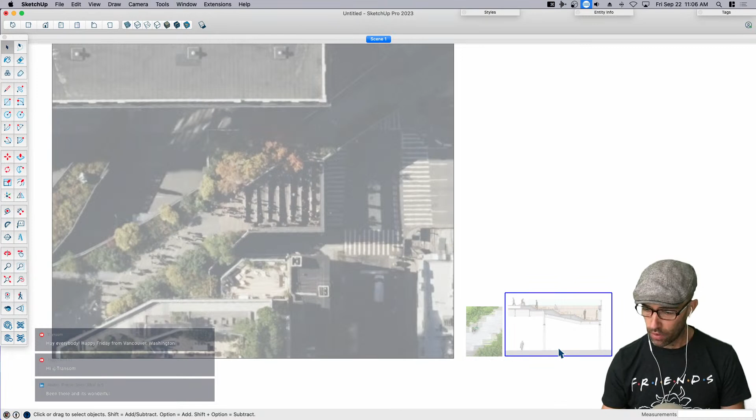One of them is an elevation image, and that's going to be really good because we're working with grade changes - we're up in the air, so knowing that is important since we're changing grade along that part of the High Line. The other thing I want to work with is this paving module. If I turn my X-ray mode off, you can see it better. This paving module is kind of iconic, based off the railroad ties that used to be up there, so I'm going to build some of those. That module is really cool too, because as you move along the High Line, it sort of becomes other things - it becomes other parts of the park.

If we're lucky, depending on how far we get, I'd love to put some plants into it, because if you just had the concrete and the wood, it feels like it's missing something. What would an Eric model be without plants? I know - I've got to represent my background, my peeps, my landscape folks.

For those that know, when I trace stuff I like to change my color and sometimes my profiles, push this up a bit. I actually have a tracing style built into my template - if I click on this one it should be called tracing, built around the idea of tracing. Once I'm done tracing over an image, I'll switch back to my normal drafting. The other thing I want to do is lock the image, so I'll group it and lock it so I won't accidentally delete it.

So this first part, Donovan, I'm just going to trace this here. I've already scaled this image, so I know it's to scale - I'm just going to trace it. Let me know what's going on in the chat while I get something started.

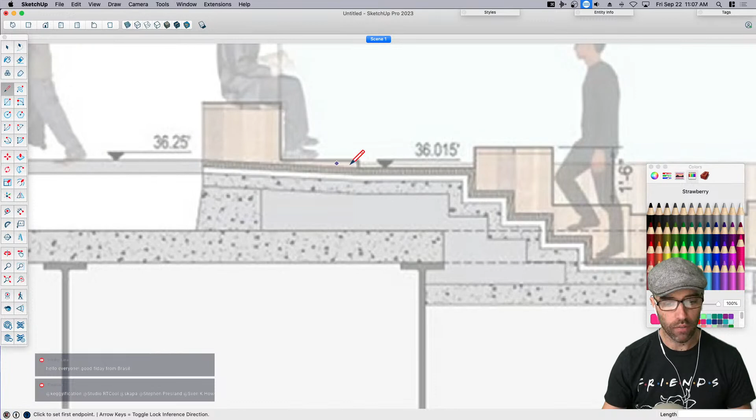We've got people chiming in from London, Copenhagen Denmark, Vancouver Washington. A couple people said they've been there and it's wonderful. One person said they went but it was raining, so mixed experiences depending on the weather. We have people from Brazil, and of course here in the U.S. Lots of shout outs to the regulars here in the chat - you know who you are, you're here all the time.

That's interesting - sorry Donovan, to interrupt you there. This is 36.25 as my landing elevation, but when I go 36.25 foot and bring it down, it's actually bringing me below grade. What this means is when they do spot elevations, they're not measuring from top of street up - they're measuring from top of sea level up, treating that as zero. So if you check the dimension of the height, it would be 28 foot 8 inches, which matches the reported average of 30 feet high - that tracks with what I've read in the news.

So now the trick is that if I'm going in with spot elevations, it means I'm drawing from this line down here - so this is now my new zero line.

Does that make sense? A comment came in from YouTube saying grouping an image with something else locks it. That's clever.

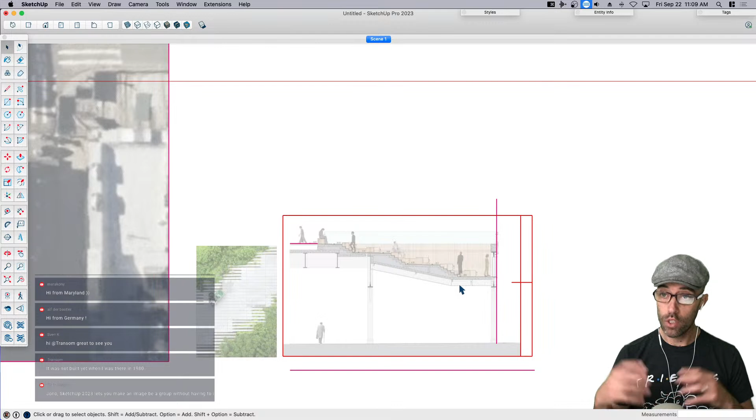When you do that, if you bring an image in and explode it, you can group the image itself because it's turned into loose geometry with edges and faces. But if you don't explode it, the reason why I don't like to explode it is because of something I often do.

What I'll do is draw on top of it, maybe add a color, and then end up drafting in monochromatic mode. So you can see what happens here when I go to hidden line style: the location snapshot, which comes in as an image or texture, disappears. So textures disappear. I prefer not to explode my images by default, so I can go to hidden line style anytime I want, otherwise I'd have to go back and I don't like that.

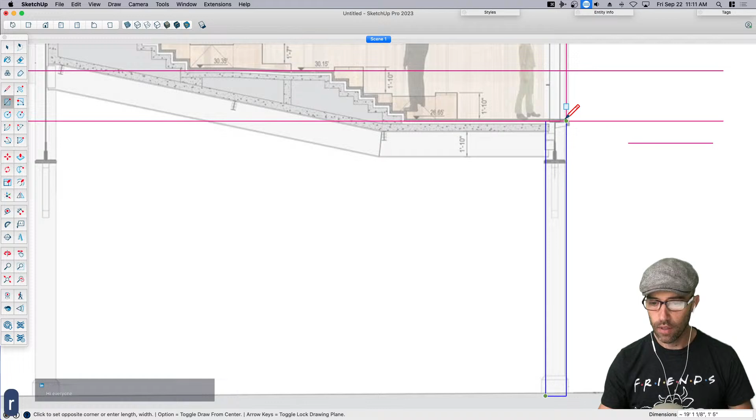Now I'm going to do this column here, and make this a component because it repeats 1 foot 5 inches. If I need to change that, I will. For right now, I'm just going to make this a generic column, make it a component, not worry about naming it—we're going pretty quick.

Usually with this kind of stuff, I'll look at it first and say, well, 34 feet 11 and a half inches—is that really the dimension, or is it probably 35 feet? So I'll enter in 35 as opposed to just placing it, because I feel more confident knowing that. In this case, I can stretch this up, stretch this one up to this column, up to the bottom. Yeah, right there. Whoops.

Did I actually—yeah, something people are talking about in the chat: SketchUp has had a new update. If you haven't already done so, be sure to update it, because there are new features like snaps in the new update that you should check out. If I can show off, I might show some snaps or those features, and I'll make sure to call those out.

I think the biggest one for people right now is probably the UI that everyone's noticing—it's going to look a little different. If you look at the icons, you'll notice my eraser tool right here isn't pink anymore, it's blue. Change is hard, but I'm a shortcut person by nature, so I do keep all my icons up because it's important when we're training. When someone's first learning SketchUp, I'll try to use the icons, but in these live streams, you'll see I'm almost using exclusively shortcuts, which is why the key caster I use is helpful as well.

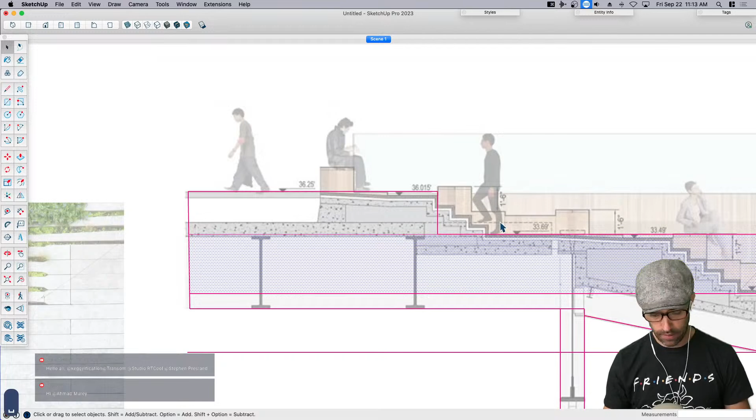36.015. I'm going to treat this whole landing as flat, just for sake of fun, because there is going to be a cross slope on it, but I'll deal with that later. I'm just going to pretend these landings—you'll notice I'm ignoring that little half inch, probably just one of those sloped drains kind of thing.

And that starts to get pretty particular. 1.5 feet? Nope, that's not it. 1 foot? Yeah, there we go. That's a 1 foot tread. So in this case, just kind of getting myself something to work with here.

Times 2. And then I have to think about what the height is. The height of a typical stair tread should be 6 inches, so let me double check that. It is 7 inches, that's okay, let's go with 7. 7 times 3, there we go.

So I may want to go back later and make the stairs a component, but for right now I'm just going to get something as my base for this thing, and then I may end up removing this piece and making them a component once I get into plan view.

That's actually interesting. So one thing I could do too is figure out where this cut is occurring. If I wanted to, I could come over here—I'm trying to think of how to do this. This is why I like to prepare, because then I actually know what I'm doing, as opposed to just having you watch me sit here like this. It's my thinking phase, because we have this in plan view and we have this in elevation view.

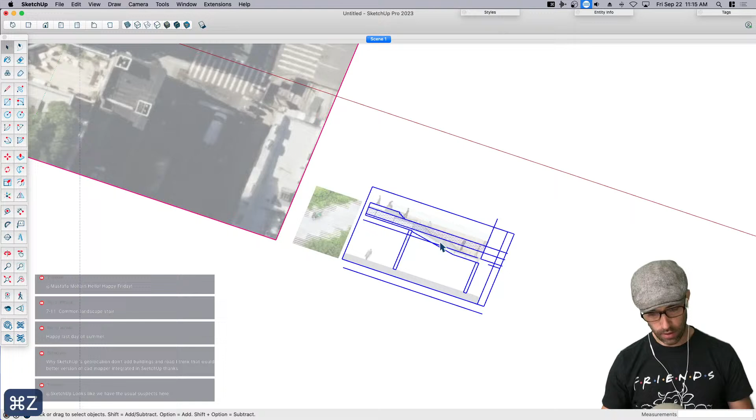Now the problem with this is, if I go to top view, you can see I'm looking straight down on it. That's kind of the challenge. So one thing I like to do is make this a component, and then copy it over, and copy it up 90 degrees. Are you with me?

And then I'll move this into place over here where it belongs on the plan view. So if I look at this, I know this corner here lines up with this edge right here—a little blurry as I get close—I know that's that.

The cool thing about that is I could also come in and, just for fun, sink this for the moment. So we could start low and pretend that this is the bottom of the image and work our way up, or start high and work our way down. It just depends on whether you want to sink below grade or push pull up. Sometimes it's easier, I've found, to pull things up than to push things down, but it's totally a preference.

Cool thing about making—what situations would you do the working from the top down rather than bottom up?

It's just because, depending on your style, if you have the ground showing—like if I have ground and push down into the ground, then you're going to see it, you'll see the ground through it. So if you wanted to show something below like zero grade, that might be a situation where you'd want to work above rather than go down below grade.

So, yeah, now I'm trying to think here. I'm going to take this module and make this sort of a module, and the reason why is, so how tall do you think that is? 1.5 foot? Yeah, I'm going to say that's 18 inches.

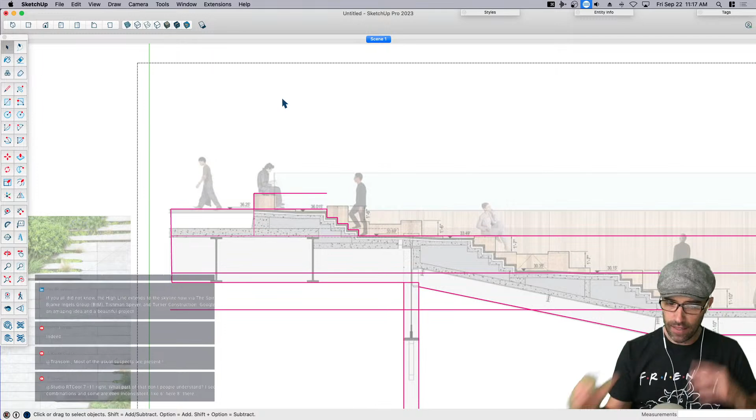So I'm curious, do you guys have to do this—this is the fun part, it's the thinking while modeling, right? It's one thing if it's your model, you can make it whatever you want, but if you're modeling something from drawings, you've got to do a lot of thinking. So thinking and modeling is kind of actually hard to do.

2 foot. Somebody chimed in from LinkedIn, said if you don't already know, the High Line extends to the skyline now via the Spiral, 66 Hudson. I don't think I knew that. Google the Spiral in New York City—it's an amazing idea and a beautiful project, the Spiral in New York City. Should we Google that?

We'll have to come back to that right now because I want to stay on seat walls, as much fun as... so the Spiral is, I know the Vessel—I know that's a little bit different though, that one's in the Hudson Yards.

Nobody's chimed in to say it yet, but you might as well save. You know what, that's a great idea. I appreciate that. We're gonna save this High Line.

So what I need here is anything I know is going to repeat, I'm just making it a component for right now. Oh, I see, I've got a little stray edge there, that's why my bounding box is being funny. So right now I'm still in elevation view, which is a little bit... let's get out of elevation view, but I have to have enough to work with before I can switch to plan view. I need to make sure I've got some faces that can be extruded.

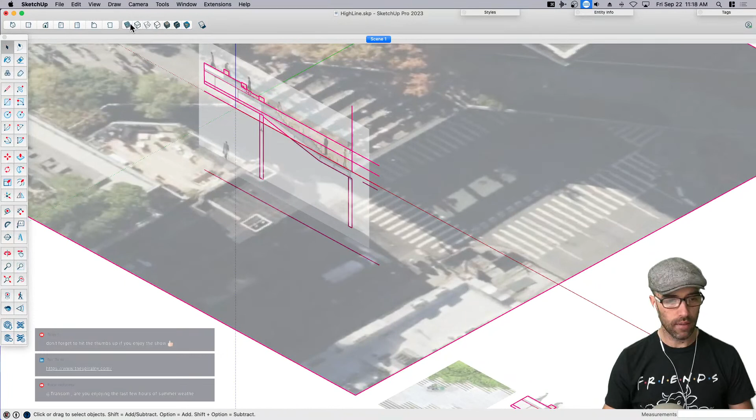So you can see here what I mean by doing this in two ways. I can now come over here when I feel comfortable and say, well, I'm going to take this and extrude it out like that. Now the problem is that my image disappears when I do that. This is the challenge, I may end up copying this, doing the opposite, which is copying my image and bringing it inside of my group, which is a little bit weird. But then that way when I'm working on pulling this stuff out, I'm doing it properly.

Yeah, I'm going to do this, I'm going to hide this. Whoops, I didn't mean to hide everything, I meant to hide just... it's different shortcuts. I just said two seconds ago, I mean, it did what you wanted it to do.

So this is going to be, I'm going to call this my AXO view. I'm going to update this. And then what I'm going to do is unhide this here, and I will go into plan view and create a scene called plan view, so I can bounce back and forth between the two. Plan. Rename plan. All right, so AXO and plan. There we go. All right, so back to plan.

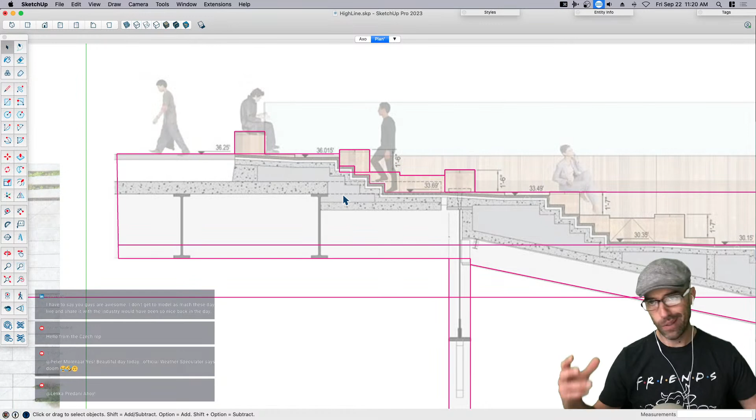What is the plan? The plan is to finish mocking up just the straight elevation, and then I'm going to take all this stuff here. Let's see here, I'm just going to create this. I'm not going to worry about all the subflooring, I'm not going to worry about any of the support structures. We're not going to go into detail about what's happening below the surface. We want to just think about this as just the surface and above.

All right, so we're going to get another seat wall module. I'm going to bring that over here, and I'm not worried about the horizontal dimensions because those will just work themselves out eventually. So I'm just going to kind of line it up with the image.

So Ben from LinkedIn said, I have to say you guys are awesome. I don't get to model as much these days, and watching you all model live and share it with the industry would have been so nice back in the day. Yeah, thanks Ben, appreciate it for watching and all.

Oh, that's weird, see this is the problem with 3D when you do this in 3D. So I'm probably going to just come in here and remove that part of the component and stay in 2D until I'm done.

Yeah, this is, I mean, I would totally watch these. I didn't get to watch these learning the software either, but watching Aaron and seeing how he handles stuff, especially when things don't go according to plan, which occasionally they don't. And also the fact that you get to join us, you get to ask the questions. If there's something we're going over a little too fast, or if you're like, hey, why did you do it that way, this is a chance to sort of participate in that process, which is pretty cool.

And this one I probably want to... I'm just going to move the stairs. I just need these stairs, so I'm going to copy them and bring them over here.

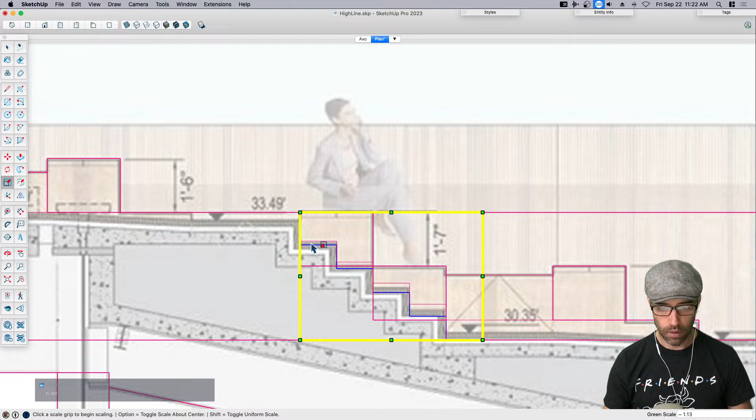Because I'm pretending not to get to the cross slopes, I'm going to have to cheat this a little bit. The reason why is I'm going to make the stair treads a little bit higher so I don't have to do a cross slope on my horizontal. It's just going to be a little visual trick, a little higher than 7 inches.

I made that a group first because I was stretching it, and if I did that, I would stretch all the geometry. So at some point in time we'll explode all this stuff, which is going to be kind of cool.

Like that game, Exploding Kittens, you ever play that one? Donovan, are you a card game person? We play card games in my house every day, and that's not an exaggeration. We haven't as a family gotten into Exploding Kittens yet because I think my kids are a little bit too young for it, but one day Exploding Kittens will be in my house. I've had the opportunity to play with friends, and the company that makes Exploding Kittens and all of their subsequent games they've come out with, there's probably like 30 or 40 now, are all just fantastic. They do a great job.

So I'm just going to start exploding stuff here. Now I'm at a point where I'm ready to clean this up, get out of this elevation tracing mode I'm in right now, and start actually turning stuff into 3D. But I needed something to work with, otherwise it's like, how do you do this? You don't have something to start with.

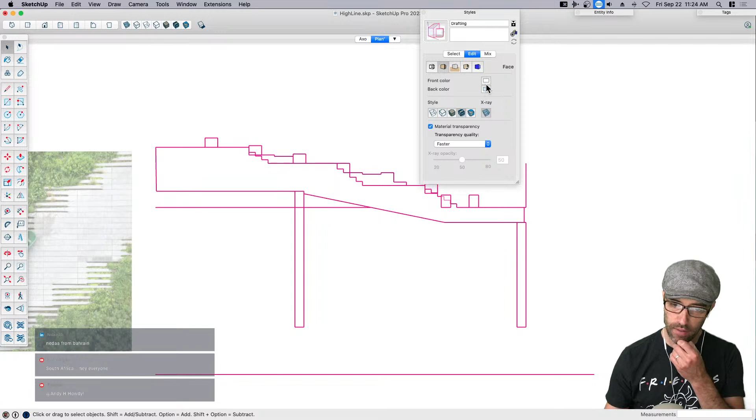So anytime I get a line, I'm really wanting to make sure ultimately I'm also going to have to hide my faces, hide this. Sometimes it helps here if you wanted to change your background style or your face style. In this case, if I wanted to do like a gray or something, I could use a dark gray, and what that would do is tell me when my faces are filled in.

The problem I have is when modeling on a white background, because when you go monochrome everything turns white. And if you have a gray background and go monochrome, everything turns gray. So instead I do the opposite: I turn my faces gray and leave everything else white.

So this just tells me, okay, I was doing some cleanup and I need to go in and make sure all of the stuff is faces. So I'm exploding all those. I didn't really need to make them all components, but whenever I have something repeat, I make it a component. I don't know if that's going to bite me in the butt, but at least I could still remake the component.

I mean, why would it bite you in the butt? Well, just out of curiosity -- because if I wanted to apply a texture to one component, or add a beveled edge or something, once I get into 3D, if I just extrude these each as their individual raw geometry, then any changes I make to a seat wall, like bringing it up an inch, I'd have to do that manually to each one.

What happened here? Ooh. Yeah.

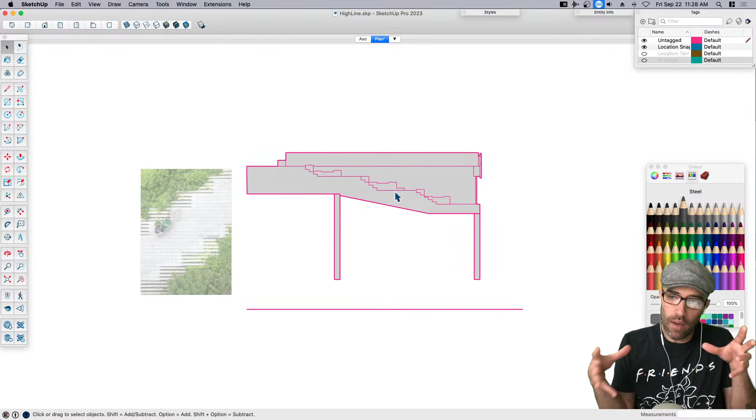This is the area, the observation deck part of the High Line. I'm going to come in and do the decking, the benches, these cool modular concrete pieces, lay out some of the walkway, and then put some planting in. So we've got quite a bit to do, and we're 28 minutes in.

The hard part is this setup. The hardest part is this thinking part, do you know what I mean? Yeah, I know what you mean.

This kind of reminds me of Matt's t-shirt, 'Fix it in pre.' You've got to do all the setup work, the pre-work. Yeah, but now think about fixing in pre.

I don't know where my image went, I might have to go get another one. I might have to come over here to geolocation, I may have accidentally deleted my geolocation. I don't think I locked it. Are you inside a component? Because it looks like your axis went off too. No, I don't think so. Nope, I'm outside of it.

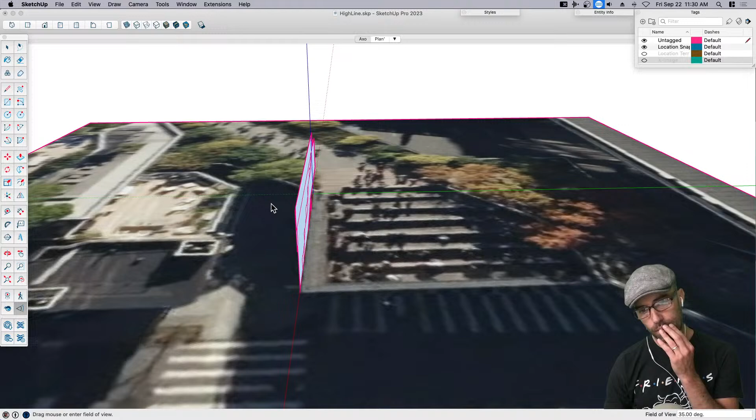What I want to do here is turn off this image, and come back to this one, turn this one off as well. For those who don't know, I model quite a bit, and I like to model in axonometric mode, in parallel projection, since I think it's easier for some people to see. I'll try to do this for you though, which is to model in perspective. What we need to do is pull all this stuff out to here, which is going to be the tricky bit because we're at an angle.

So if I just trace what I know the bounding box is, I'm going to go to here, and I'm just guessing at this point because I don't have any plan view information. I know there's a walkway that runs along this edge, and we're going to take our decking all the way to, I think the decking goes to here. So there we go, that's what we're going to do.

I'm going to come over here and bring those down so they sit flush. There we go.

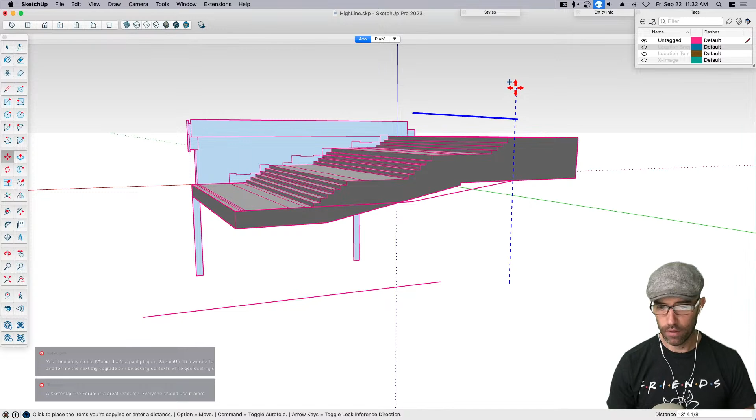Yeah, so speaking of, good, I like it when you talk for a few minutes Donovan, because it lets me think about what I'm doing, I swear. So for people who have seen me live model, I shouldn't have to apologize for being who I am, but I do better when I'm prepared because it means I follow my script. My wife tells me this: when you go off script, Eric, you tend to not do as well. So I will say that, I don't want to apologize, but you have to kind of struggle through with me for a little bit.

What I'm trying to do is figure out, I need to slice this off, but it's not a solid. I would use solid tools and then just delete this. Instead, I'm going to probably grab this as a cutting plane, pop in here, and select all of this and say intersect with selection. In fact, I may want to explode this first, which I'd usually say be careful when you're exploding stuff. And I'm going to switch my style back to just my normal style.

Why do you want to explode it first? Well, because I'm going to use that edge. I'm going to right click everything and say intersect with selection, not with model, because you have to be careful - if it's exploded, it's going to interact with both this and this. So what I'd do is sometimes just grab this piece here. You're going to see here in just a second. I want to grab this face, that's why. So I'm going to copy that.

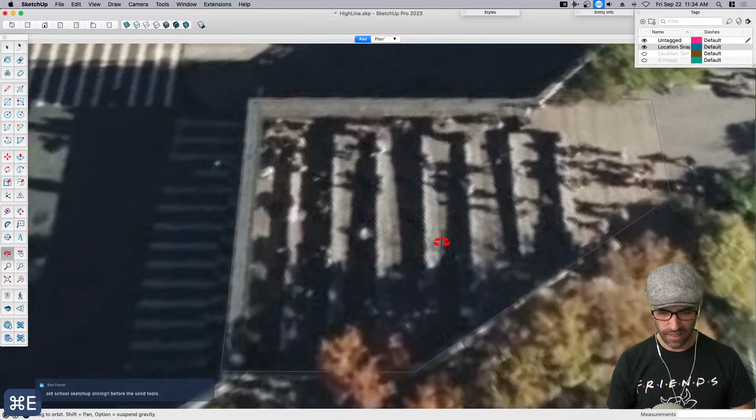So now there is a stramp that goes down this piece, but I don't know, I have to decide. I may want to come back to that, because we're going to cut into this and need to do a stramp, but it's going to be a little difficult for me to see. The reason is because if you look at the location snapshot, if I hide this for a second, it's kind of blurry, to be honest. I know there's a stramp that cuts through there, and I think, but I'd have to switch to a photograph and see that.

See, I made a big mistake. The stairs only come down one side. This is why you look at the photographs first. The stairs are not the whole thing - the whole thing is a stramp, and the stairs only come down to one side.

So unfortunately I have to undo quite a bit of that. I will leave this, I'll go all the way up into where I had a cutting plane. I will leave my cutting plane because I think I'm still going to need it. So I'll just group that, copy it, and then undo that extrusion that I pulled.

Look at all my Command C's that you see with my keycaster, it's a lot. You can do up to 100 undos - for those that don't know this, you can go up to 100 undos.

So you copied it because even though you undo, you can still paste. Yes, at any point. So that's a good point. I can come over here and paste in place, and that cutting plane. So that's kind of fun.

Sometimes I'll go in advance, get a piece that I need, almost like a time machine, go back in time, do something, and then paste in place that thing that I needed in a future step. I don't actually need that thing in the future, I don't actually want that, but I need it now. So I go back in time, I copy from myself and then go undo. You can also obviously do a save as and then go work into a separate model, but I'd rather just work in the same model.

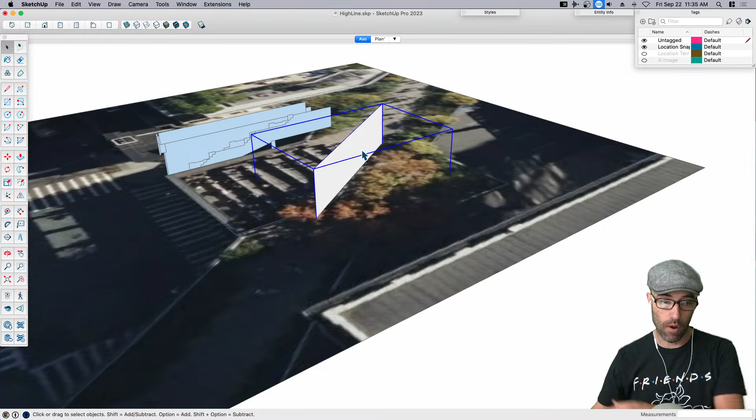So what I needed to do, and I made a mistake, what I needed to do was do these stairs separately because they only show up on that first walkway bit, and then from there they stop. So I'm actually grouping the stairs separate from the rest of this geometry. If I was smart, I would have done that - I would have looked at the reference photo before.

Fun times. Okay, so I could also do there is a new, hey, I'm gonna try a new feature. There is a lasso select tool, which I hear is kind of cool. So I may be able to come over here and just lasso select those. That didn't work, I think it's because I had to go this way. So the lasso select is whatever it touches, correct? Yep.

So if I'm trying to do this really kind of tight, irregular space, like these stairs, I could just take that. And so what I want to do is basically, I don't know where my stairs... Donovan, this is where I need help. What did I do? No, you didn't do anything.

I'm just going to do another version of this. I'm going to come back to that because I'm going to need it. And I'm just going to come into this version of it, and I'm just going to pull all the stairs out completely. I'll just go back to my other version later. Okay. Right, folks? See what I'm throwing down?

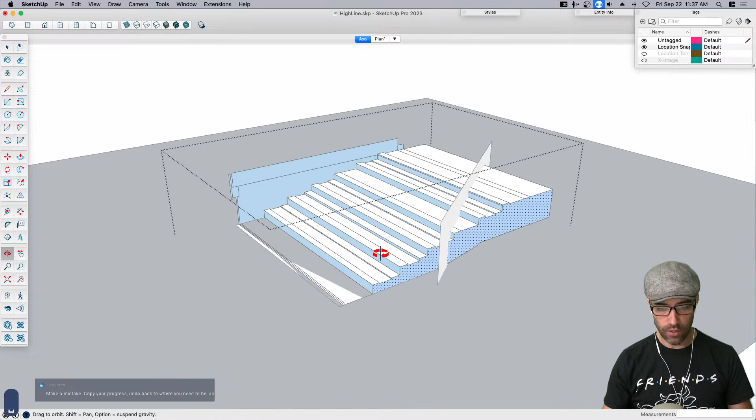What I want to do is I just want to pull. This is tough because we're working at an angle. We're working in plan view and elevation view at the same time. So this is what I'm trying to get to here. And then what we have to do is I'm going to have to pull some of these surfaces down. That's going to create the stramp.

And then what I'm going to do is come over here, and I'm just going to get rid of all this stuff because I already have it saved in the other one. So almost like I needed to do this in several pieces.

Hope this is fun for everyone at home, hope this is, learn from my mistakes. This is how we do this on SketchUp Live. Learn from what I'm doing. In some cases, it may not work for you at home, folks. I mean, honestly, if there's one thing we've learned from Live is that people enjoy the struggle. So it's okay, I've learned that the struggle is okay because ultimately people enjoy watching us struggle. Yes. You know what? Also, misery does love company, I hear. So I'm really glad to have everybody at home with me as I kind of go through this process, or process, as they say, for our Canadian viewers that are with us today.

All right, so what I'm doing here is I'm going to want to do this in a couple different pieces. Why am I losing a face? And I know people are saying I have reverse faces. So a fun way to check that is sometimes it's hard to tell - if you come over to shadows, you can actually pull your darkness and lightness sliders all the way down. And you can see that when I did that extrusion, everything is reversed. So I may want to just fix that now, is just go in and reverse all of those.

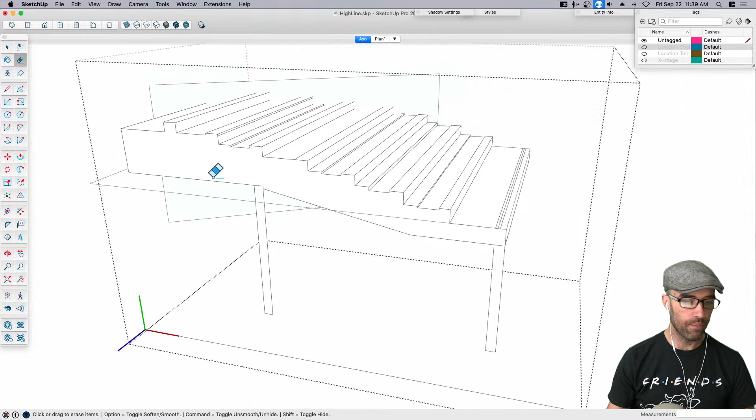So if we go back to this plan view here, now I go in here and grab this group. First thing I need to do is check this dimension. This is the stair here, these are the stairs, so I just need to check. I have no idea, it's pretty blurry. 4 foot, I could guess. Is that a 4 foot stair? Yeah, I'm going to go with 4 foot.

So then what I would do is come over here back to my axo view. Styles, set that, turn that on, update, and update. Okay, so from here I would want to come in here and push this 4 feet.

And then I would come over here and find, where's the one that I copied, Donovan? I don't know, where'd it go? Remember how I hid one? Did you remember how I hid one? Yeah.

Well, are you going to pull up an old save point? Might be able to go into an archive based on when I last saved it, and go in and grab this one here, the one with the stairs. And then if I was, see this, and then I come over here and just paste that right in place.

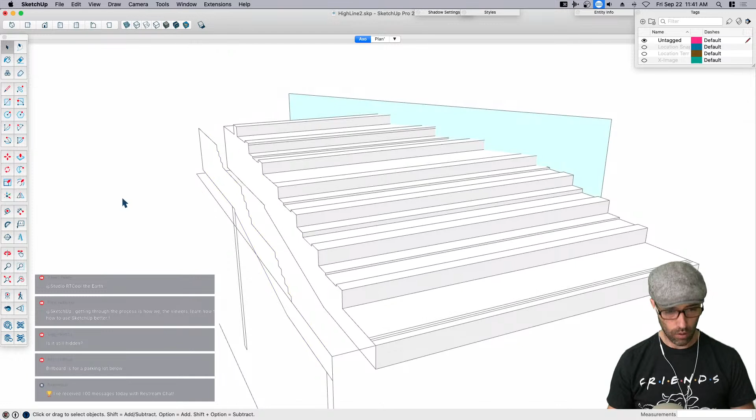Now, because it's a component, if I go into this group and paste that in place, you'll notice what happens. Peggy's asking, is it still hidden? No, I just turned on my hidden geometry, which I can show you. View, hidden geometry, view, hidden objects. They're both on. The only other thing I may have done is accidentally assigned it to a different tag. But no, it disappeared. You know what that means? So I probably deleted it.

It's okay, it's okay, folks. All right, are we okay with that? Yep, are you okay with that? I need you to say yes right now, Donovan. I need your help. If you're okay with that, I'm okay with that. Okay folks, let's do this then.

Let's go back here, I'm going to copy this, go back, and do this step again. I'm going to explode this. I'm going to select all of these two things here, intersect faces with model. I'm going to grab that face, copy it. This I want to do a group delete. And this one I have to be really careful with, I don't want to get stuff that I don't want to. Group delete, paste in place. And we're okay, we're back. Salvaged, nice recovery, nice recovery. Okay.

Now I've got to figure out this stramp, because there's no actual.

Let's go back and look at our reference image. The stramp goes down on the other side. Right? So in a way, it starts on one side and it curves and it goes around the backside, which means that some of these seat walls would not go all the way. They couldn't go all the way, it would need to stop 4 feet prior. So where would you be if you were a stramp?

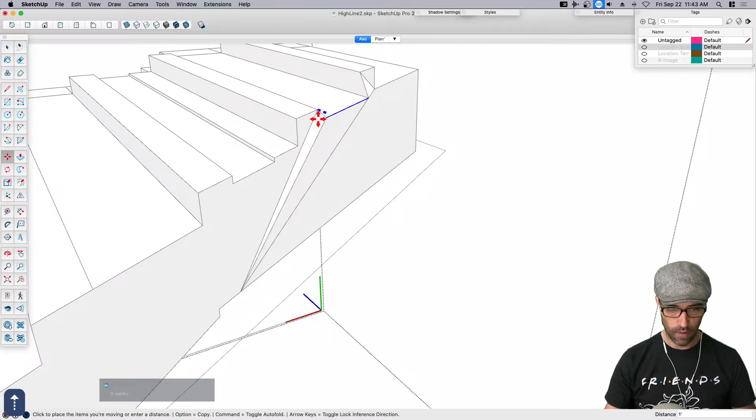I would say that you'd have to come down here, and you'd have to come down, and I'm going to use my inference locking to go down. Nope, not that one, there. And I would come to this point here. And then this one needs to come back.

Oh, maybe you want to do that the other way around. It's probably easier to... here, let me recenter this for you so it's easier for you to see at home, folks. I wish I could hear from the audience. I wish they could just shout out in real time and be like, no, that doesn't work, don't do it that way, have you tried this? That would be interesting to have a live audience participation. Might get a little chaotic, but I'm sure we'd manage.

So this is a trick here. Now, the problem with this is that when you go down, it's going to hold. It's sticky, right? So what you may want to do is take this and this, take what is the ramp, just basically take...

Let's see here, it may be better to come in here and just grade it the old-fashioned way. So what I mean by the old-fashioned way is just to come in here and grab a line and start the top of slope and then come all the way down. We know it needs to go to there. And if you're wondering where this is, sometimes it's as simple as a single line, and sometimes it's more complex and you need to do something like sandbox from contours. But I'm calling that. So you also have to think about where the landing is. So if this landing is flat here, then I can erase that line.

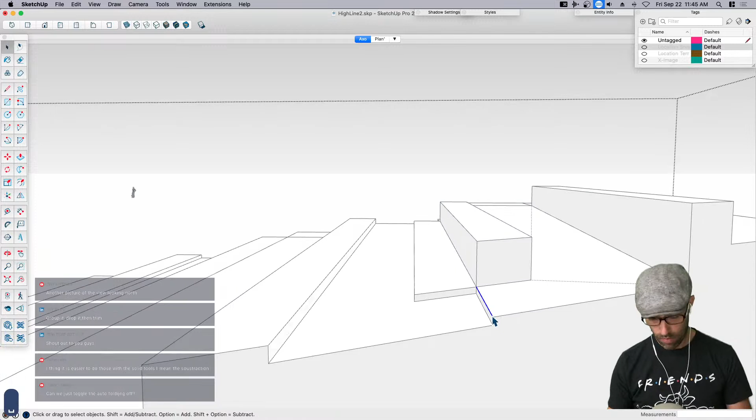You guys didn't know you were going to get a grading lesson at home today. You thought we were doing plants and concrete pavers, but no, you're going to get a grading lesson like it or not. Doing lives with you for as long as I have, I always know there's more to learn than just what you're modeling. I'm an educator as well and I have kids, so I go back and forth between wanting to enlighten and threatening you're going to learn something whether you like it or not. Is that my parent mode or my teacher mode? You're going to get some grades.

Now this is interesting because I don't know what this is. It makes me think there's a little foot platform, almost so that as the stramp goes down, your feet can stay level. I'm guessing that's what that is. I don't remember, to be honest, I was there but I don't remember. So I'm just going to cheat this and make what may or may not be ADA - we're going to call that ADA.

Ahmad from the YouTube comments says, can we just toggle the auto folding off? I don't know, can we? It's above my pay grade. I don't know, I don't know.

Where's Aaron and Tyson? Are they with us today? I haven't seen him yet. Because when you say above pay grade, they both have their legacy, they're old school. They know all those things that I should know, and I don't. I just kind of know what I know, I know what works, sometimes.

Okay, so this bench is okay to go all the way here, and the reason why it's okay to do that is because that one I can't erase, that is a grade change. So that one needs to stay there, and that one has to be hidden.

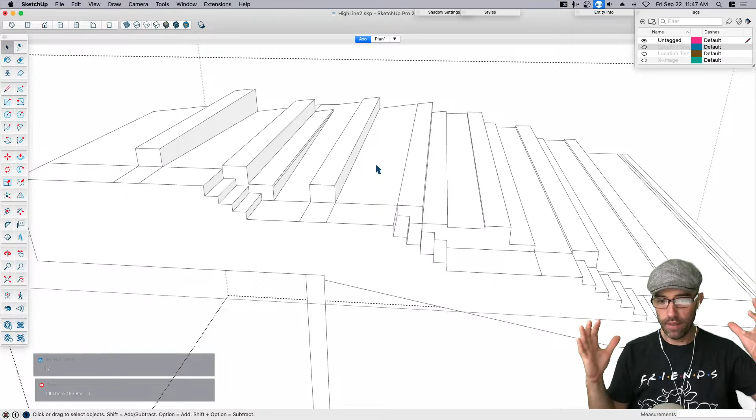All right folks, we've got a couple more of these ramps here, we're almost at the hour. I want to finish the stramp, then spend the next maybe 20 minutes doing the shell of the amphitheater so it's walled in, and then we're gonna have some fun. We'll spend the last half doing pavings and plants and furnishing, kind of build out the actual High Line, the linear path part of this.

Thanks everybody for staying with us, and if you're just joining us, welcome. We're doing the High Line today, this part of the High Line. If you didn't catch the beginning, we're doing this really cool part of the High Line called the observation deck. You're up high, then you drop down low, and you're able to see the cars. You have furnishings and trees and places to hang out, stairs and a stramp and art and all kinds of cool plants. That's what we're doing.

That concept seems very humorous to me, that there is an observation deck for you to watch traffic. Yeah, it feels a bit silly.

Okay, so this one has to go down here, has to come over 4 feet, and then that has to come down. It's actually kind of cool, to be honest. I'm probably the last person who would sit and want to watch cars, but it's actually, because if you know anything about me, my background's in urban design, and part of my job is to get people out of their cars.

My past life - actually it's not a past life because it's still important, it's still an important part. That's part of why I started using SketchUp, as a designer being able to communicate ideas and sell concepts, especially with something that's new or foreign or scary. I think SketchUp does such a great job at taking a really complex idea and breaking it down in a way that's easy for you to understand.

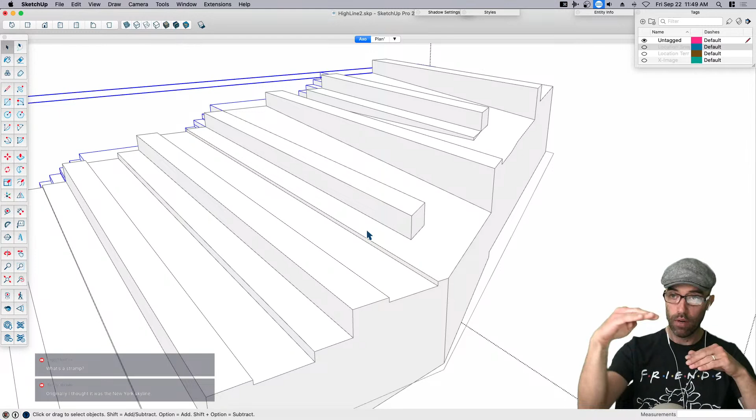Kagi chimed in and said, what's a stramp? A stramp is a combination of a ramp and a stair, so the ramp actually crisscrosses the stairs - the stairs go up and the ramp cuts through it. So this is not really a stramp because it's more like stadium seating, cutting through stadium seating. So it might be - I don't even want to know what the acronym is for that. I guess stadium and stair might be the same thing.

Hey Kagi, how are you man? Doing good?

He said thanks. Stair and a ramp - sorry, I shouldn't assume people know that. That's a good question, keep those coming.

Deb31 from YouTube says look up Robson Square or Arthur Erickson. Good point, Robson Square - that ramp was like, I think, one of the first ones. It's pretty iconic. Yeah, look up Robson Square, that's in Vancouver.

So you've been here - does that mean there's a sketch in your sketchbook of this particular view or area? No, I don't think I was drawing. Oh, no, I did have my sketchbook - I was with my son. I have a picture of me and my son, and he's holding a stuffed monkey he got at the top of the Empire State Building.

He was wearing an I Heart NYC shirt. I took my son and we walked the entire length of the High Line. He walked - I was telling Donovan this before - my son was about 6 at the time, and he's got way more energy than I do. He walked all the way from the Natural History Museum to Brooklyn in one afternoon. If anyone knows how far that is - I was exhausted, and he's just like, let's keep going.

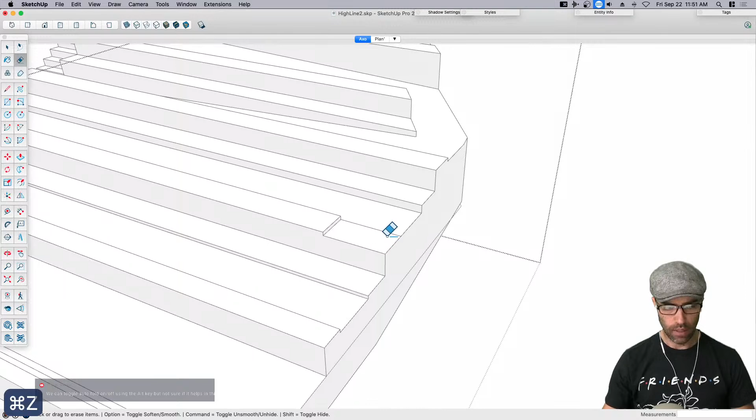It's like, dude. All right, so we're down now here, we're almost done. Now we turn the corner, and we have to come down this way. So we're going to come over 4 foot, because that's the distance I'm giving myself here. Wait, that's not right here, is it? Oh, I know why - this one has to come down, this one has to come down to there. And then this can come over because we're coming down this one. So we're going to grab this one and we're going to grab that.

If anyone's ever done grading in SketchUp - actually, it's not even SketchUp specific, if anyone grades anything ever, you'll find there's always just fun challenges with grading.

I want this one to come down here. This needs to be there. No, yeah, that's Randy right from YouTube.

He's asking about, does this give it wheelchair accessibility? Yes - actually, I don't know, I mean technically yes, but if you're going to do it properly, you need handrails, you need rails. I don't think, if you look at the image on this one, it doesn't have them the full length of the ramp, so it may not technically qualify as ADA accessible, even though, yes, it would provide accessibility. So the question is whether it is accessible under the law or accessible under intent, which may not be the same thing.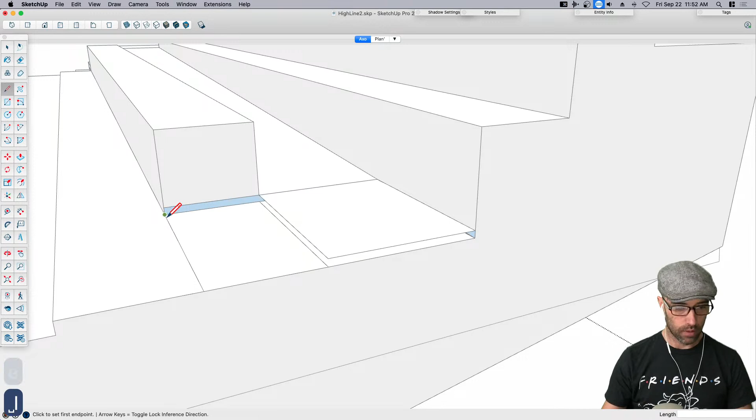So this one is this little tiny ramp down here, and then that one can go away. Okay, so you've got this little landing here, and you kind of turn the corner - although actually I'm going to undo that because we need to turn more than just the corner. We actually have to turn, this whole thing has to come flat. Yeah, how do I get this to inference? That goes there, and then that goes. Sometimes if I can't get something to inference right, I just copy it - I take this over here and just slide it over.

Interesting. So Donovan, what kind of stuff are you modeling lately? What kind of stuff are you working on? You always have some cool projects going on.

In our house, we have a 2-story house, and under the stairs, where they usually construct a coat closet, for some odd reason when they built this house they finished out that entire area. So it goes down and back, under the initial part of the stairs. Right now what I'm doing is taking my iPad and going into this little space under the stairs and measuring everything out.

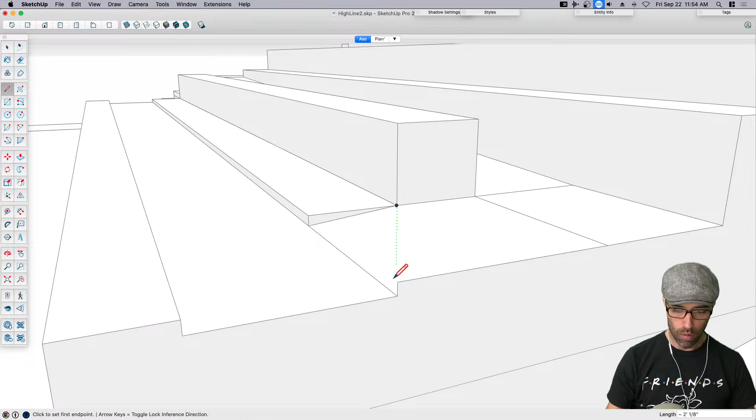One of the projects I'm going to be working on before Christmas is to make a hobbit hole where the door will be in the living room, and kids can open it up and go under the stairs. I'm going to wall it off to make a coat closet, but save that area behind it so my kids have a hidden play place just for them. That's what I'm modeling right now.

So what have you learned? What has SketchUp taught you in the modeling process?

Oh no, this doesn't look right because this ramp's supposed to take us here, but we've got one step in the way. I'm just going to ignore that and keep going. We're going to pretend that little last step isn't there.

It's our little secret. Randy from YouTube says he's been modeling Jerry Seinfeld's apartment. Oh, get out of here. I've always wanted to do the Simpsons house, and I'm sure somebody else has already done it or tried it, but I just want to tell myself not to let that stop me.

That could be a live topic, modeling the Simpsons house. I think it would be really hard though, because where would you even start? You could just do the exterior, but then you'd be like, well, I could just do the kitchen.

It's kind of like what we're doing here. You end up spending more time just looking at the image, thinking okay, there's carrot curtains, and then counting how many cupboards there are — 1, 2, 3, 4 — and you end up spending forever on it.

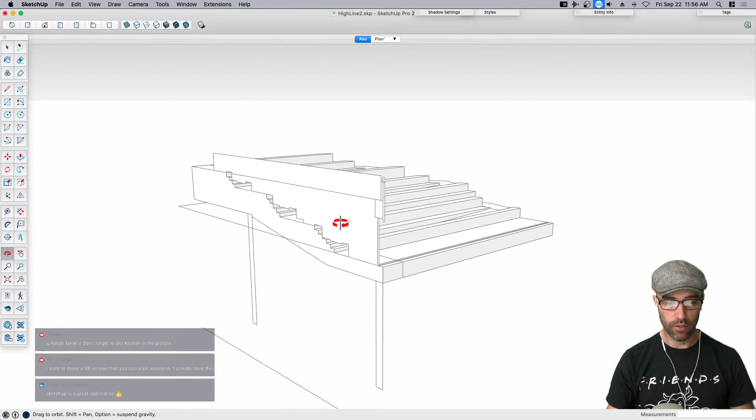I did lose that little bit there, so I'm going to do the wall. I'm going to grab it from my archived version, group it, copy it, and come over here. Luckily everything's in the same place. I go into my component, paste it in place, and there it is — it shows up magically in my Axo view.

Cool thing about this is that I like going in between components, so if I want to work outside of that group or component, I can paste it in place. I only used it to transfer from my reference image into my 3D, and once it's in there, I don't need it — I'd rather have this in my 3D space.

So in this case, what I want to do is pull this out. I know there's a little upper landing if you look at the reference image, but I'm going to ignore that for now just to keep going. There is kind of an upper area, but we can always add that — I'm just going to pretend it isn't there since you can't really see it in this image anyway, and model this as if that's just the main area.

Randy chimed back in and said he's creating Jerry Seinfeld's apartment as a VR version you can walk around in. Really? That's a cool application — yeah, I want to go in there.

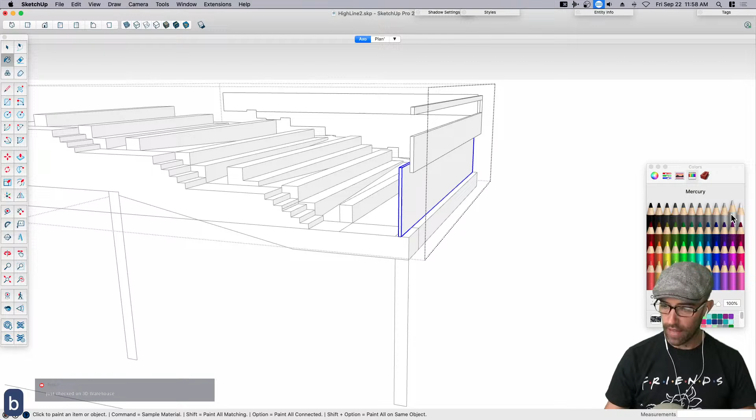What I'm doing here is grouping all of these, because when I pull this over I want to have them separate from each other. It's much easier to group something in 2D than to select all the geometry and group it after the fact. I want to keep these pieces separate because they're different elements — for example, this one right here is glass, so I'm going to set that as glass now so we can already see that's going to be the glass part of it. Cool, eh?

Cool. And if we wanted to do some color, which we don't have to, but I like to work in color, we can look at this idea that the frame is black and there are one, two, three internal dividers. The elevation won't show that, and it also doesn't show that it's sort of enclosed.

So I might come over here and do something like this, just drag that, and make up a dimension. I don't know what that should be. I'm going to move that there, make it a component, enter it. I can't even see it, but I'll pull it anyway.

Then I'm going to come over here and start making the frame elements black, and that's a component. One thing I like to do is what I call lazy modeling—sometimes I'll take this component, drag it over, divide it by three, and these ones may actually be different. So I just start with one component and then make it unique, and from there I can scale it.

How do I want to do this? Scale it by 0.75, and then come over here and scale this by 0.75 too, using the same component just for ease. And I think this is glass too.

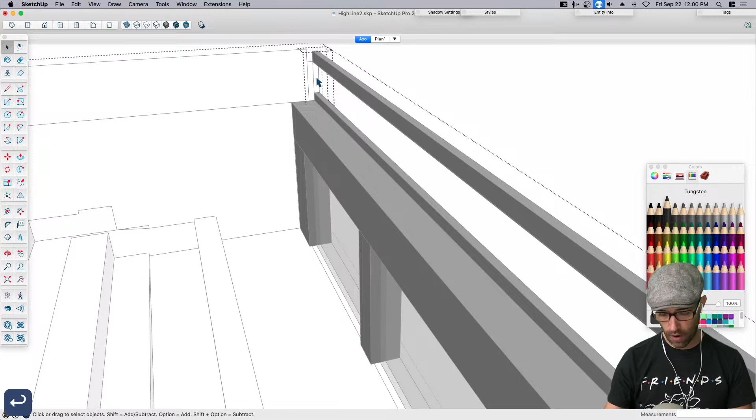It's hard—sometimes when you're far away, it's hard to double click onto something, so I'll select it and just hit enter. Now this is all wood. I'm going to give it not necessarily a wood color, but just a brown color for anything that's going to become wood if I end up texturing this later.

And this wall here, you can see it in elevation, but this is where it gets tricky because this wall would be closed off, but it was being blocked. The ramp we built sort of exposed some of these pieces. So we're getting somewhere, everyone—it's starting to look like something.

All right, so this I believe is a different material. I'm going to group this one here, copy it, and paste it outside of this group. Then I'll come in here and delete all this—I'll show you why in a second, because I'm just going to end up redrawing this anyway. It's easier than filling in all those little gaps, especially because it's at a different angle.

In this case, I'm just going to give this a thickness, even though I don't know what it would be here, but just so we have something, I'll give it a little six-inch thickness. Then this part would actually be much thinner if that's glass—so think about it.

If you look at the image here, that's not glass—that is a fence. I'm going to make it a different color, just give it sort of a solid, lighter gray.

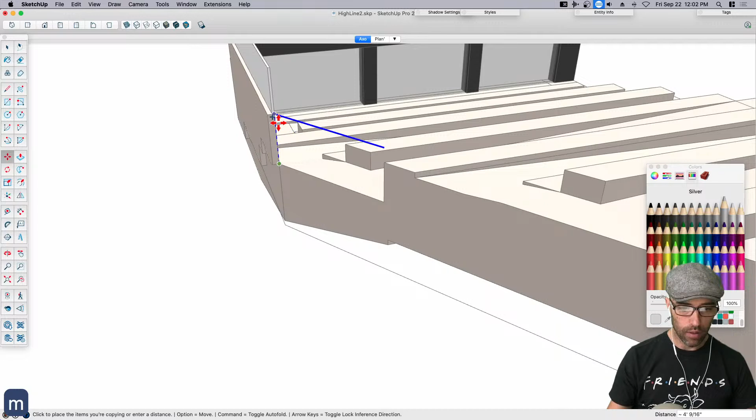So that's a fence. In this case, I need to take this and turn this corner, so I have to figure out the best way to do it. What I might do instead is grab this line, come over here and grab a line, then move that up to there, and copy it using the inferencing all the way along that edge.

And from that picture, it looked like most of this area is just like wood planking. Is that what it is? Yeah.

And then this one would pull out—I would pull this out. Sorry, it's probably hard for you to see; sometimes I get into these weird angles where I can't see what I'm doing, so I'll try to get a better angle.

This one would go into here. Nope, didn't mean to do that. I wanted to grab that one, delete that, go into this one, and explode it.

You'll notice it changed color automatically because I painted the outside of the group, which some people say is okay and others say not to do. Just letting you know I'm one of those people who paints the outsides of groups, so when I pasted it into this group, it automatically changed to that color.

All right, so now we're ready to build out the rest of the deck. That's pretty cool, so let's put a person in there for scale. No, I'll come back and do that later, I don't want to mess up anything. We do need a wall on this side.

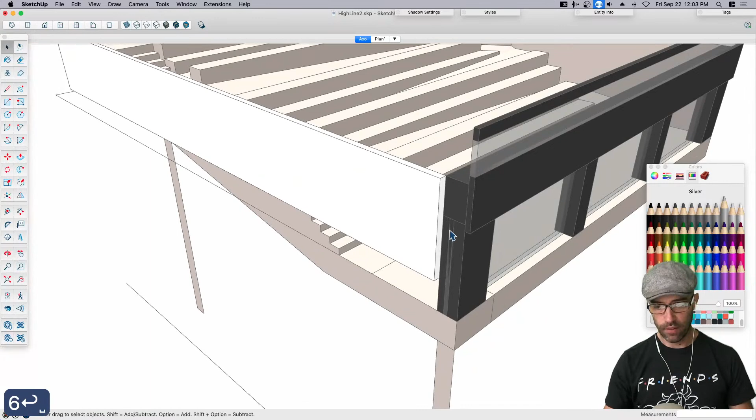If we look at this here really quick, there is a wall on that side. So I'm just going to wall this in, and just draw a basic wall for now and use that. Just kind of, yeah, there we go. And pull that out 6 inches just to give it something that sort of feels like a sense of enclosure. And then I can just call it.

And I'm going to bring that one down at an angle. So to do that, I need to figure out where this one goes. Somebody finding it hard, like when you're drawing the underside of something and you end up tilting your head, almost like you're really in it. It's funny because the 3D model, that's the cool thing about 3D modeling, is that it's so convincing that we even kind of tilt our heads as if we're there.

I can explode. Speaking of which, do you use a 3D space mouse, like Aaron does when he models, or? No, and I should, because it would be a way smoother experience sometimes.

So something to think about. Does anyone else use the space mouse? I like the space mouse, I don't have anything against it. I actually have one, not the big one that he has with all the programmable keys, I have one of the little ones. It's more for navigation, or great for 3D tours. If you're gonna do an animation or a screen cap, it's so much better because you don't get the click, click, click, click, click. But working, I've just been doing this for so long, it's just habit.

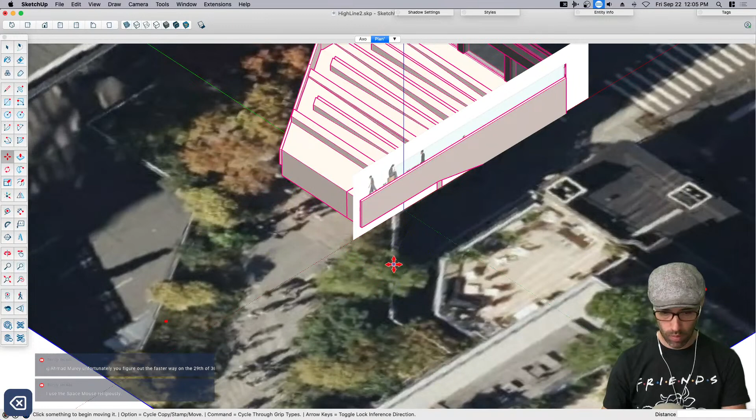Yeah, I do the majority of the SketchUp work that I do all on iPad because I use that version more than anything. So it's all finger navigation, like you do. And switching over to the desktop version, I have a space mouse sitting here on my desk, but I haven't set it up yet to use it effectively. A large part of that is simply because, like I said, the majority of the sketch work I do is just on the iPad, because it's convenient, and it's better for my artistic brain to work with the pen and the iPad than SketchUp on desktop. I was going to say, are you using the pen then and not your finger? Obviously on iPad I wouldn't want to use my finger, but who knows, you can. Well, I use the finger for navigation to orbit around, so kind of a combination of the finger, zoom in, zoom out, and the pen. Yep.

All right, so what I'm doing here, sorry if I'm doing this at a weird angle, I am trying to just get this. I'm copying lines so that I know I'm being consistent, that I'm parallel. I could use inferencing, but I'm just going to do it that way. So I don't want to do this whole thing, so I'm just going to lop this off. You can see I just lopped off a part of it. So if I come over here and turn my image to go back to my axo view, you can see this is kind of what I wanted. So if I hide this for right now temporarily, whoops, not that.

This should all be one group, is it? No. Okay, let's group everything together, and I'll do the columns and stuff towards the end. I'm not too concerned about the columns right now, I kind of want to just do everything that's on the surface. And that needs to group with that. Okay, there we go. So what I wanted to do...

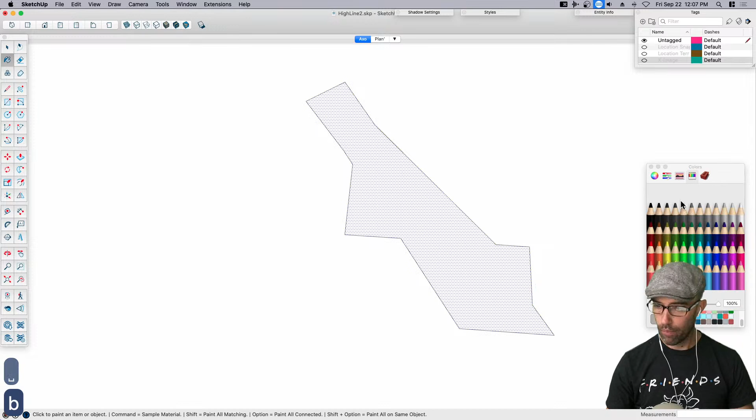I thought I remember Aaron talking about doing a piece of content about how to set up the space mouse, but I don't know if anything ever came from that. I think that's coming out.

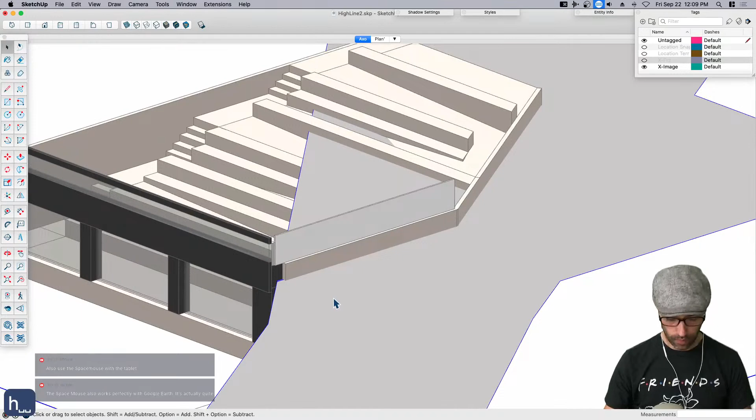So what I want to do is break this edge here because I don't want it going through my model that I just built, my observation deck. I want it to stop at the observation deck, so I'm going to need to go around and break that. Sometimes intersect works, sometimes it doesn't — it really just depends on what you're intersecting.

In this case, I can group, delete. Have you saved recently? Not recently, no. All right, so now if this comes up to here, that's what I'm gonna say — okay, that's what we're working with here.

All right folks, now I can switch and do the modular paving. I'm gonna pull up a different reference image, if you don't mind. There's some really cool design in this modular paver, the way it was designed.

It's based on the width of the railroad gauge, and it's used as a transition between where it lets plants in and out. I think that's because they were really inspired — James Corner, the designer, you can see in this image — it opens up, the paving concrete module opens up and transitions from concrete to planting, but it has this thin transition. It does it over a length of time, as opposed to a straight line, a harsh transition. I think that's pretty cool because it gives you the ability — if you've been to the High Line — as you move up and down and walk linearly, the pavers stay in one direction. So as the path moves, that transition between hard edge and soft edge is really a dynamic transition.

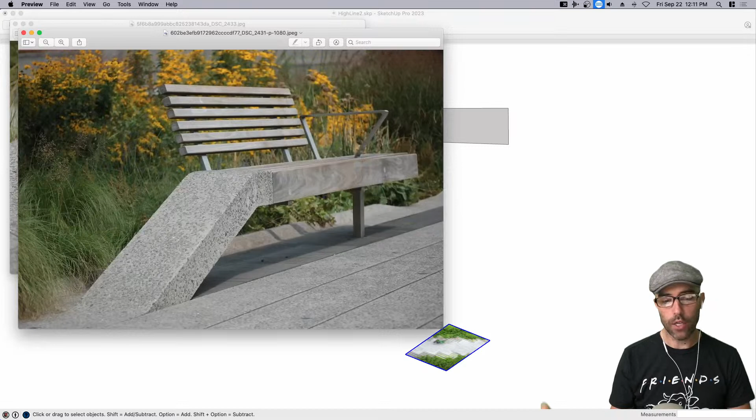I'll show you one more image and then we're going to go do it. Let me see, do I have that image? No, I don't. But this module also becomes other things — this same module becomes benches, lights, drains, and the planting edge. That's what we're going to do: lay out some modules.

Fantastic, yeah, I love modules. I don't know about you, but modules are the bomb, because they're modular, right?

So I already did some math, and I'm going to redo it. A train — if you guys know this — a rail gauge, at least in the US, is standard, it's this weird number: 4 foot 8.5 inches, a kind of random number. I don't know the thickness of the rail, but if I set 2 inches and copy that again, 4 inches, I'm giving myself about 4 inches of breathing room on either side of the rail — the tracks. When I say rail, I mean the metal part of the tracks. If you check the dimensions, the space between that is what starts to get interesting — these ones are in lines of 4, but I was looking at another image.

This one, I don't know if that was the image. Where was another reference image that I had? Maybe I didn't save it.

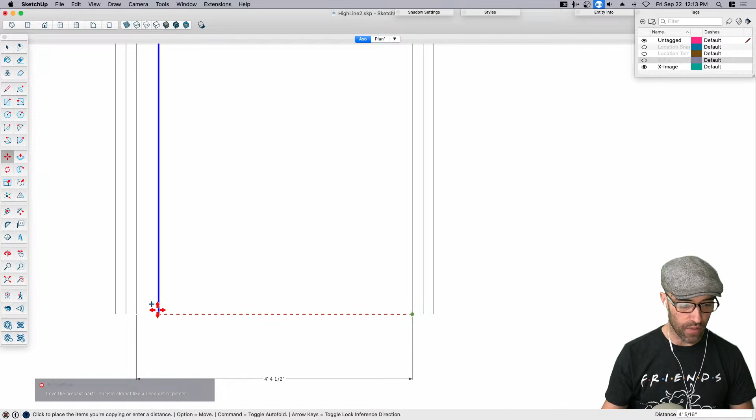They had 5 modules. Right now they're showing them in 4, but they're actually in rows of 5 in between the rail lines, the existing rail lines on the High Line. My point is that's the dimension of this module. So if I copy a line over and divide by 5, you can see what I have here: 1, 2, 3, 4, 5 modules fit between 2 rail tracks, not rail ties.

Does that make sense? From the YouTube comment, Studio RT Cool says, I love the precast parts. They're almost like a Lego set of pieces.

Yeah, so that adds up to, and I don't know how right this is because there's probably a quarter of an inch for a grout line on either side. So it's probably 10 inches, but I'm going to ignore the grout line or joint for this. I'm actually just going to do the 10.5, and we're going to let the SketchUp line be that.

So I'm going to make this a component. If I was really smart, I would name it, but I'm going to ignore that for right now.

We were having a debate internally on the SketchUp team about the move tool, when you switch to move and it automatically tries to do rotate. Some people on our team love that move and rotate are the same tool because you can use them without switching, and some people don't.

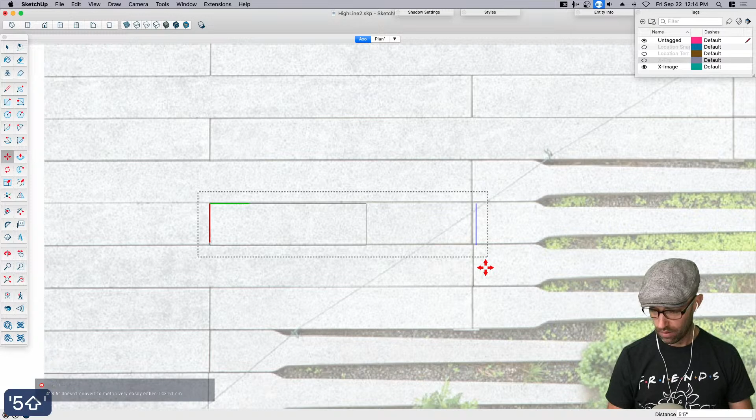I know, if we all just did metric, it would be so much easier. I mean, I would have to relearn everything, but actually that's not true. I do have experience working internationally, so I get that metric is, I get it. I just don't.

I'm going to darken my edges up just a little bit. I hope that's a little bit easier for you to see at home, folks, so I don't have to switch to my pink drafting style for this.

So one of these modules is a smaller module, and one is a larger module. For the larger module, I think it's actually the equivalent of 2 smaller modules. So if I just copied a smaller module over, what I'm going to do is stretch this. I'm cheating, it's actually the same component.

What's kind of cool about that is if I made a change to it, it's what I was trying to say earlier with the seat walls, which is what I was trying to do, and then it didn't work. In this case, I want to grab a few of these to create some semblance of it, and I'll give it a thickness too. I'm going to save, thank you for reminding me.

Okay, so this is where it gets kind of funky here. It's almost like a comb, like we're combing the plants. What I want to do is take these 4 and make these ones unique.

Oh, a little fun tip, pro tip out there for you guys. If you didn't know this, when you're tracing an image in X-ray mode, if you have your styles set up for your face style to be nicer, you're going to see, and of course it doesn't work here, but earlier when I was tracing over, you remember Donovan?

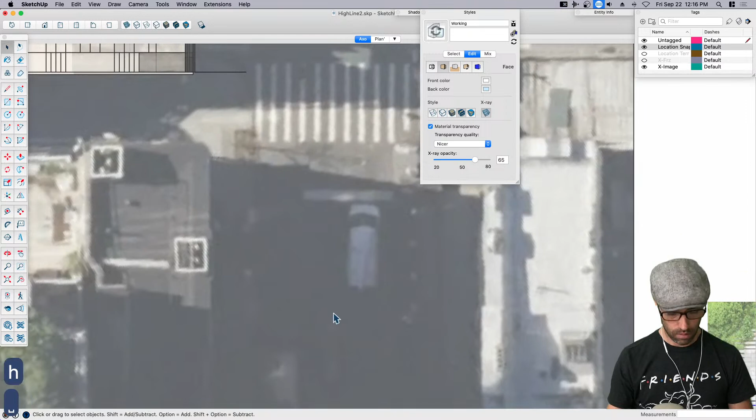Switch from nicer to faster, and that trick will make it so you can actually see through your faces. So, pro tip.

Peggy chimed in and said, try living in the UK. We're supposed to be a metric country, and we use kilos, grams, centimeters, etc. But we also use miles per hour, pints, and other imperial measurements as well. I watch BritBox shows pretty regularly, and it always weirds me out when they talk about miles per hour, because I'm like, wait, is that right? Are they supposed to be saying that?

So I'm not sure how to do this other than the fact that I'm going to cut this in half. If you're wondering what I'm doing here, I'm going to delete half of this because I'm just going to flip the thing over.

So what I need to do is, if I move this over, I need this to taper. I need this line to go from here. That doesn't really look... oh, I see. It doesn't look quite as right as it did earlier on the other side, but that's okay, I'm gonna run with it. I need to taper from here down to here, and I'm just splitting that in half, and I don't know if that's the right thing to do or not.

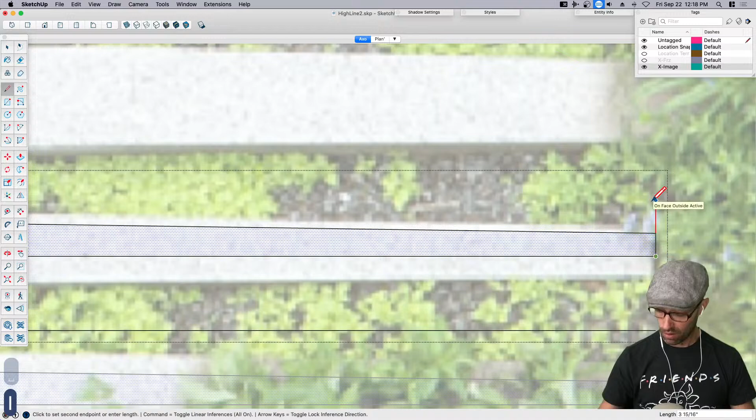So that's that. If I had the dimensions, that's only 1.5 inches, but maybe minimum that probably needs to be 4, so I'm going to go up to 4. I'm going to change that and go back in, because once you get less than 4 inches on concrete, it starts to get pretty thin. So this is where I want to see if this works out the way that I had planned.

If you think about this, there are 2 ways to do this. We could either take a curve and tangent it and make a reverse curve, and call that done. Or if you really wanted to, we could use the fillet tool, which I don't think I want to because I just did it even faster using that reverse curve.

But I did want to show, for those that have a CAD background, there is a fillet tool. It's part of 1001 bit tools. I kind of don't like these extensions that have a whole ton of tools, I kind of just want the ones that I want, but you don't have to use all of them.

So I set a keyboard shortcut for fillet, if I go to preferences, keyboard shortcut fillet, I have Shift F. So if I hit Shift F, it's going to prompt me: choose an edge, this edge, choose another edge, this edge, what's your fillet radius. I'll type in, let's go with 3 inches. And do you see what it did there on that curve? It just automatically did that fillet for me.

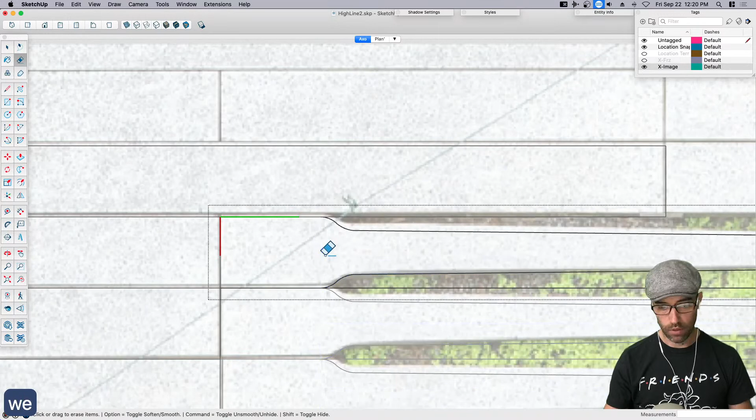So if you have a CAD background and you're used to filleting in CAD, which I used all the time back a long time ago, don't use it anymore, but I think it's actually really nice when you're doing streets and things like that, where you need a really precise certain radius. So I'm going to take that, I'm going to scale. I could use the flip tool, the new flip tool, which works great, but I'm just a creature of habit, so I'm just going to go ahead and do it that way.

This is where white on white background, again, sometimes gets me into trouble. So sometimes I'll just turn a ground on just for a moment, just for a second, so I can close that face, and then I turn that back off.

I do like... yeah, that is something I've noticed as a difference between the different people at SketchUp, is that you definitely use colors in SketchUp, you utilize colors a lot more than a lot of other people seem to. You just mean on our team, like in the live modeling team? Yeah.

I guess I also use color by tag. Part of it for me is that I'm just so ingrained to having things tagged and organized. To me, I see color, like I see things this way. It helps me because I'm always thinking about materiality, especially when you go to render. Anyone with render experience knows you're pre-thinking everything by material, because you either want to group it by material, tag it by material, or apply a dummy or placeholder color in advance. That's going to speed everything up later. So when I work with color, it's because I'm trying to pre-think that.

All right, I've got my 2 modules here. Speaking of color, this one actually is one module that I just shrunk. And then I've got my tooth module. So we're going to go apply some of those.

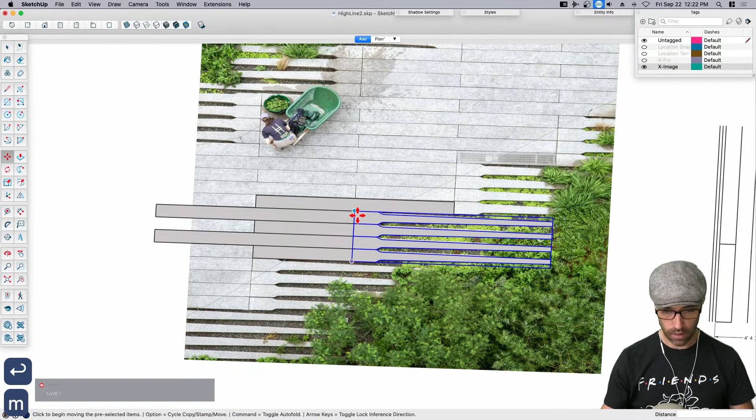I can take this and make this whole thing a component too, although I don't think I need to since the module itself is already a component. The only reason I might do that is if I had to tweak or shift something, I could do it to one and it would apply to all of them. As a rule, it's probably a good idea to make things components first, since you can always turn it back into a group later. If you're not sure, err on the side of caution and go with component. Some people, like Dave R, are in the camp of componentizing everything, and there are reasons to do that. If you're counting things, having it as a component lets you select all instances, which you can't do with groups.

Okay, so don't need that, that was just to figure out what my spacing was. Got my spacing, got my teeth. Let's go see if we can apply some of these. I'm going to take a few of these since I have them lined up like this, and just copy them over.

This is going to be a little tricky because I need to figure out how... if I turn my location snapshot on and turn X-ray mode on, this is going to be really hard at this scale because I'm not able to see. All I can kind of see is what's planting.

The other option is we could do something like this. There's a module right there, that's where the module starts, at the end of this deck. Do you see where I'm pointing? And then that's the beginning of the planting area. Using this module, let's count them: 1, 2, 3, 4. So this looks to be a 4 module, but I know I've seen them in 5. Where the train tracks are, they put them in modules of 5.

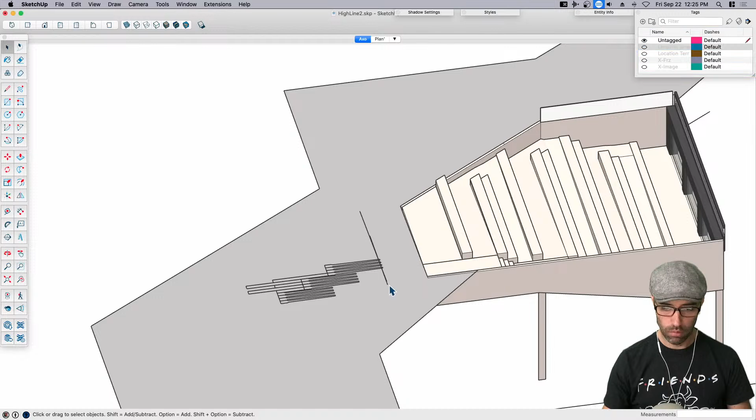Transom chimed in the YouTube comments, said they told us in grade school in 1969 that we were shifting to metric. I'm still waiting. But speaking as a carpenter, I do like feet and inches. That's something I hear a lot, because I used to live overseas and I've seen both the metric and imperial sides of living. One constant is construction, and how universal and easy it is using imperial compared to metric, which I think is one of the main reasons we're still imperial.

Well, I always thought it was just American superiority. We just like to do things differently and make everybody follow along. It's just a way to mess with people. I don't know, I'm half joking. I just think when things get so ingrained, it becomes really difficult to change, even when we know a better system works. Like we all know this from our own lives, like I know I really should do this, and I know I really shouldn't, and what do we do? We end up doing it anyway.

So just one of those things. Change is tough once it's institutionalized.

This probably needs to come up here, doesn't it? This needs to come up till it matches that, because that's going to keep you from dropping over the edge, right? Okay. And then these stairs, if I wanted to, these probably have a handrail in here too.

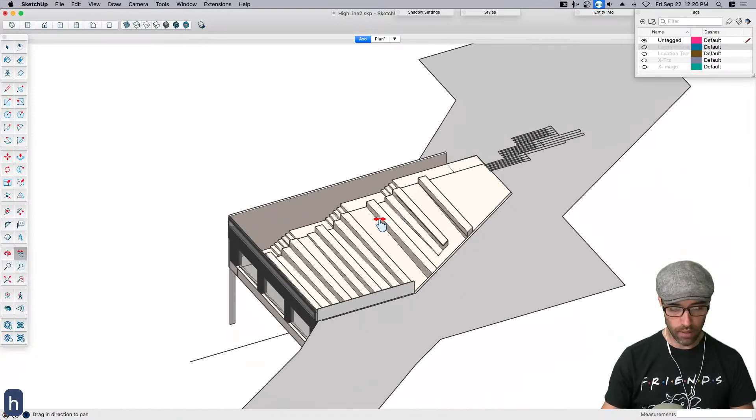Oh, we're getting somewhere, folks. We're getting somewhere, I like this. How much time do we have? Oh, we got half an hour. All right, let's see what we can do in half an hour. Yeah, we're good. I don't like to go further than we have to.

I'm going to pull this back. I don't know where this starts, but I'm going to pull this back. I want it in line with the first seawall.

All right, so I don't really need more of these because I'm just going to probably copy it from this original module. The tricky part about this next is going to be tracing the outline and then dropping the planter bed down, but we'll jump off that bridge, literally, when we get to it. We're on the High Line. We'll jump off that High Line when we get to it.

All right, folks, so this is where I'm eventually going to get rid of this. I don't really need this, it's just kind of a placeholder for me so that I'm working flat, because we're above the ground. I want to make sure I'm just drawing to a plane. But in this case, I'm probably not going to use this for too long.

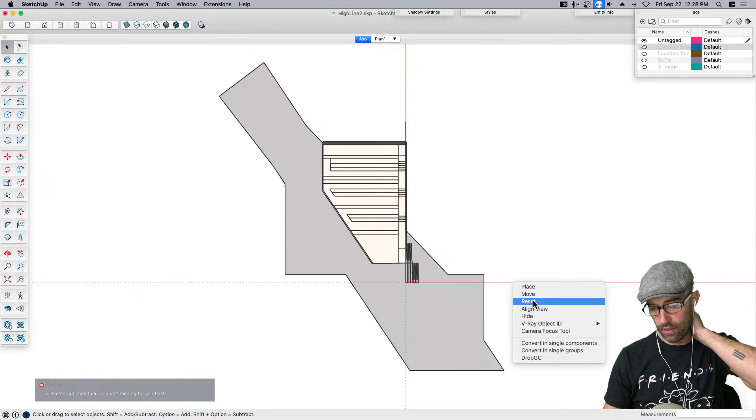Okay, so the other thing I can do, if I wanted to point this up, depending on how I want to lay these out, I could come over here and say view axis, and say place, and grab my axis and just go ping, ping, ping. And when I hit command 1, which is my shortcut for plan view, it rotates. That's like UCS. So anyone used to CAD, if I actually click reset on this, it'll go back to world UCS. So you can see the world UCS in real life.

The High Line actually goes this direction because New York is on the island, and the whole island is at sort of an angle. So in this case, what I want to do is go back. I'm actually drawing to a rotated UCS, or rotated axis if we're going to use SketchUp lingo.

So I don't know how many of these there are. I feel like they go as far as they need to, and then it depends on how much planting they want to do. I'm guessing they probably don't have more than two modules in a row, and the reason for that is because it keeps the planting somewhat staggered. I don't know what's going on in that zone.

That's interesting. That is a very cool use of an existing space.

So I'm going to pretend like these go in groups of two here. Although this could very well... I don't know, I have to go look, we have to go to street view unfortunately. We're going to have to take a walk for a moment. Okay, I see, so if you look here this might give me a better idea. It's a little blurry, but this module starts at about halfway. That makes a lot more sense, and that's how I would have done it. You can see if you start this module, if you wait, then what you do is you end up having these corners. So if I recheck the dimension of this, it's 10 foot 10 inches, and then I go back 5 foot 5 inches, so that makes a lot more sense.

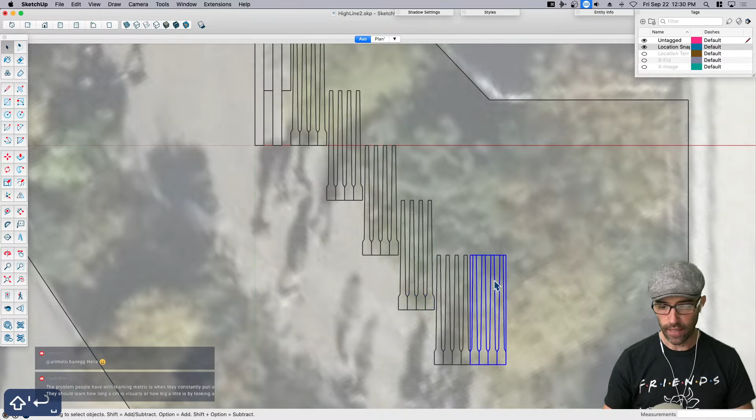I'm thinking that you're going to get those more staggered, like in a line like that, right? Do you agree? Yeah, yeah.

Okay, it's looking good, you're agreeable. I like that you're so agreeable, Mr. Donovan, that's why I work with you. I am the voice of inexperience, talking to the voice of experience, and so I've learned that it's best to agree with what's going on when somebody knows what they're doing and is talking to you.

No, actually it was fun. I had Aaron, speaking of voice of experience, I had Aaron on with me last time, and it was kind of a little bit of a different experience because it was like, in a way, I kind of appreciate Donovan, where you do represent sort of the voice of a lot of our users, which is, hey, some of this is still over my head. And that's good, because in that way the questions you ask are really good. Sorry, I can't talk and do math in my head at the same time, but you get what I'm throwing down.

Yep, all right, let's see what this is starting to look like.

So if I go to my AXO view, and I'm just going to switch my styles off of X-ray, I'm just going to switch that to textured and turn X-ray off, and I'm going to update that, and I'm going to kind of pick a cool view here. And then I'm going to come over to my styles, and I'm going to maybe...

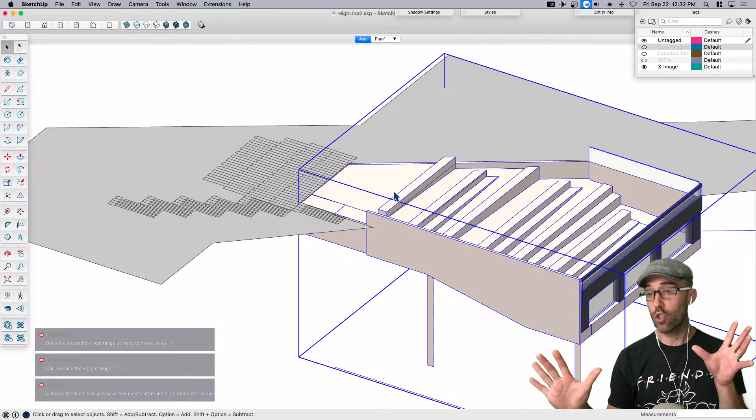Yeah, I'm not sure. I want to put some wood texture on this, I'm going to texture this in a little bit, but let me lay out at least this group. Let me just kind of... actually, which way do I want to do this? I'm going to do this the opposite way. So I'm going to turn my axis back on, and I'm going to say place it, and I want to go this way. The reason why is because when I look at it, I feel like it's easier for me to go up. The other thing I could do is I can change the color of this, and I can change the color of these.

There we go. So your shadow settings too, sometimes my shadow settings are set to light because I like light shadows. So sometimes what you're going to see with me when you work with me is... why are those not showing up as gray? Oh, I see why, okay, I'm just going to get rid of that. That's why, I just want to see that as an outline. I think from there I'm probably fine. Why did that one get so dark?

I actually would like to come in and maybe vary the colors a little bit, but I'm going to do that later. Okay, there we go. All right, moving right on.

Let's take these guys here, and let's take two of these and pop them over here and rotate them 90 degrees, 180 degrees. Math, folks. Math, kids. They always say, well, I don't need math. Why do I need math? Well, here's why you need math. It's because you're building stuff, and it needs to be to scale, and you need a certain number of them, and it needs to hit at a certain point, and that's why you need math, folks.

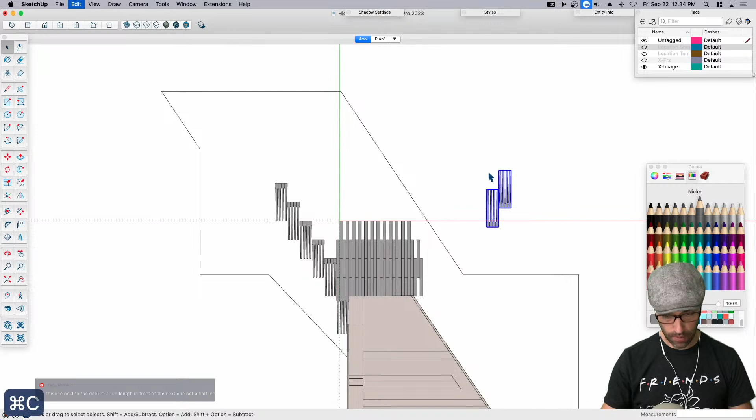So that's 5 foot 5 inches. Okay, that's that module. Oh, did I do that right? I didn't do that right. I'm going to copy that, and then I'm going to undo it. See my little trick about going back in time? And then I'm going to paste that in place. Now I have paste in place. Now I have a module that goes this way, and I have a module that goes that way. So I can just kind of grab whichever one I want.

Peggy chimed back in and said the one next to the deck is a full length in front of the next one that is half length. Oh, are you trying to say that I'm not doing this right? Is that what you're saying?

Let's go back and see where is my observation deck. We're going to go back. You're saying that we start with a full length, not a half. No, you're saying this first one is a full one. So is that something that we want to get that picky on? Because I'll say you're right, but I also don't want to relay them out. So you're right.

All right, speaking of, okay, this is going to be tricky though because I might want to just drop all of these slightly below. I'll worry about this later, but I may want to just either take them slightly below or take my scale tool and just scale it so they don't overlap. This deck here, does it have a wall on this side?

It does. It has this sort of screen wall on it here. So one way to do that is to use follow me. If I come over here and grab this line, come over here into there, paste that in place, click the new follow me tool icon, which for those of you that don't know that's follow me, it is follow me.

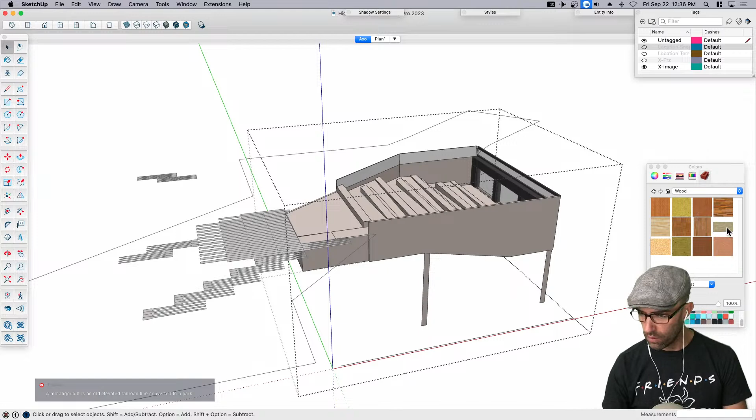These maybe aren't my favorite. I'm going to be honest with you, folks. If anyone, yeah, SketchUp Library is not my favorite materials. Yeah, not digging it. Sorry. I'm just going to go with more of a woody color for right now.

And then what we'll do is, just because it's going to bug me, one way to do this is if you explode this group, you can take all of the pieces that are supposed to be wood. So I have to be careful here. I have to double check all the pieces. Hey, what happened there?

Did I have a copy of this? Don't have any. Maybe. Do I have a copy of this floating in there? Why would I have two? That's why when I painted it, it didn't change color. The things you learn, right?

All right, I'm going to grab that. I'm going to copy that. I'm going to get out of there. I'm going to pop into this group, paste that in place. Is that more of a wood color?

Not really. Some of you are like, I can hear Aaron. I can hear Aaron in the back of my head. Move on. No one cares about the wood color.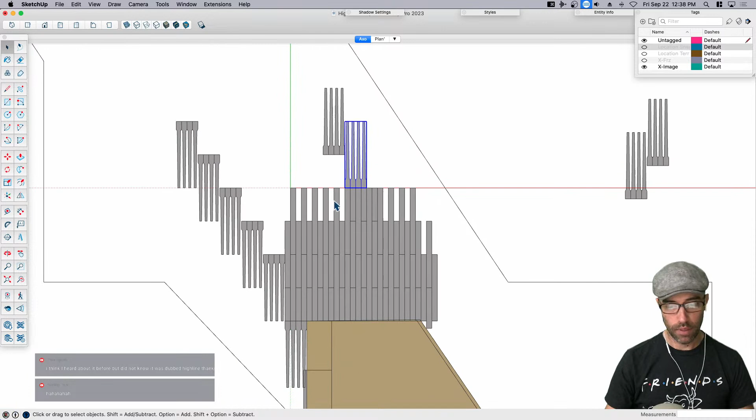Yeah, but I do. Okay, that's my answer. And Aaron, you didn't actually say that, so that's me saying that he said that. So I'm not gonna say that he said that. It's not to say that he wouldn't have said it if he was here. He might have said it. It's something he might say, so that's why I said it. I don't think he would deny it. If he would deny it, then I'll walk it back. But Aaron, you got to tell me that that's something you wouldn't say, and then I'll walk it back publicly. Until then, I'm going to say I think he'd say something like that.

There's probably a faster way to do this than just doing them one by one - I could just lay out a huge grid of them and then delete them, and that might be faster. Also, right now I have 2 modules, but I don't necessarily need 2 since I'm in 2D. So if I wanted to, anytime I place one of these, I could just grab these modules here and then scale them because I'm using the same one.

Now, that doesn't really work. Yeah, that works - I mean, I get a smaller piece. Doesn't really work though, does it? Yeah, it might. This is where I'm always open to suggestions from the audience. Wherever I know this thing is gonna go, I might just get rid of those ones completely - get rid of those 4 completely, bring this in here, and then go in later at the end and just pop in the little half module, in this case.

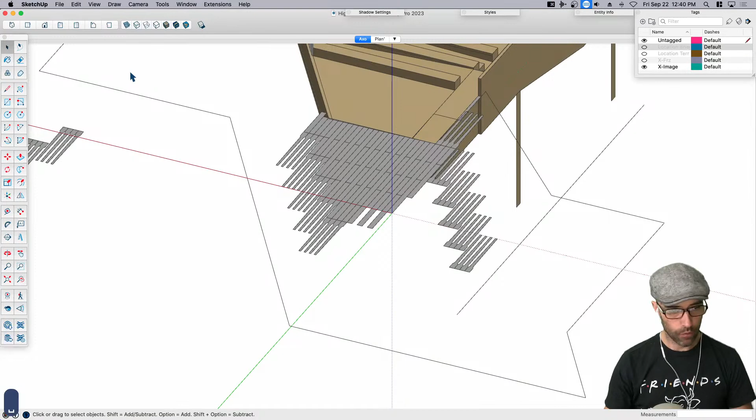So I'm going to view my axis, turn those off, and just grab a chunk of these. Yeah, it can be a little bit quicker - I just want to get a few more of these in here. To me, this is the kind of fun part because it doesn't require too much thinking - a lot of the thinking has already been done. The harder part is when you're actually trying to figure out how are we going to do this, where do we start. It's always so much harder for me.

What happened to our module there? Probably not right, but I'm going to leave it. This is when we get towards the end, we can say we've got a module, it doesn't work. That's all right though - it's still good. It's all good. So let's do some planting.

So here's the kind of tricky part with this - this is where we may be able to just come in and lift this up. I'm just going to bring this up 2 inches so that it sits above, and bring this up 2 as well. That's the nice thing about using one component for all of these - now I have a thickness. Actually, I'm going to undo that - I'll do that again in just a second, because what I want to do is come in here and just trace.

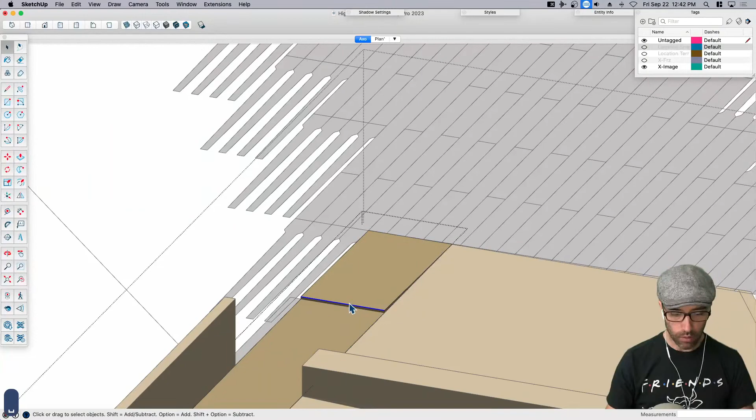Just come in and grab - why is this part of the deck sitting lower? It should sit there. What part is that? It should sit flush. All right, I'm just going to put this up here - it's so hard sometimes to get it right. And then this one here, yeah, I'll just ramp this, slope this down. There we go, okay, we're good. So what I want to do is just kind of trace an outline, just a general outline - get rid of... what is this?

I don't need this, I don't know what that is, so let's get rid of that. We want to keep that though.

We need this here because that's going to tell us. I'm going to switch to perspective for this because it might make it a little bit easier to see. We're going to go this way, this way, we're going to go here, and we want to kind of pick up behind each of these modules.

The combs, I'm going to call them the combs. The combs? The combs, yeah. Oh, the combs. The combs.

And then if I kind of grab from here to here, I want to grab to there. Oh, that's not right. Extensions, Eneroth, flatten to plane.

Sometimes when you're drawing, I have a hard time sometimes. I'll take this stuff up here, something like this, and I'll select everything and go extensions, Eneroth, flatten to plane. What it's supposed to do is break it, bring everything down to the same plane. So anyway, if I ever get stuck, that's kind of what I do.

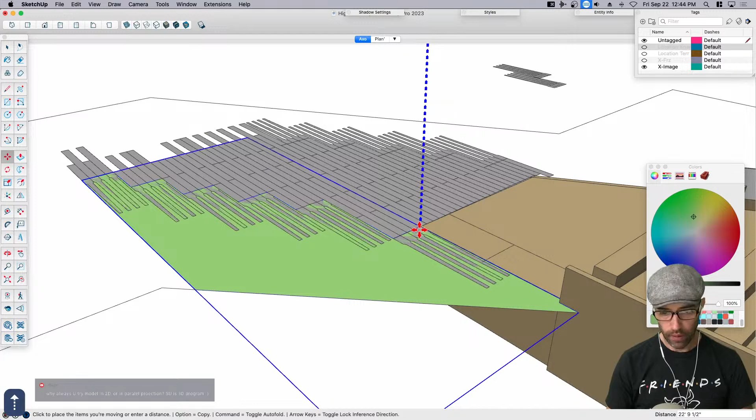Now when I come down here, I've got some green, and then I'm going to do this other side just quickly here. I'm just going to do some green over here, just so that when we capture a view of it at the end, we kind of have all the materials.

So here's what I mean by selecting all instances. If they're groups, you can't do that. Then I can come over here and say select all instances, and I can group both of those together. This way you can either group or put all your paving on the same tag, which is a quick way to do that. So if I wanted to hide something, I could do that.

So there, there, there, there, there, there, there, there, there, and that should be my green. I know there's Z fighting, but that's when I said I was going to, in just a second from now.

I'm going to come up here and grab these and pull these up, I'm going to pull them up 2 inches. So there's a little bit of a differentiation between... there we go, so you can see that now, hopefully. You can see that a little bit there. So let's, yeah, it's looking good.

So I got kind of a choice to make. We can either, in the amount of time we have left here, put some plants in, put some textures in, or I can try and see if I can squeeze a bench in. I almost feel like I don't want to do the bench right now, to be honest with you.

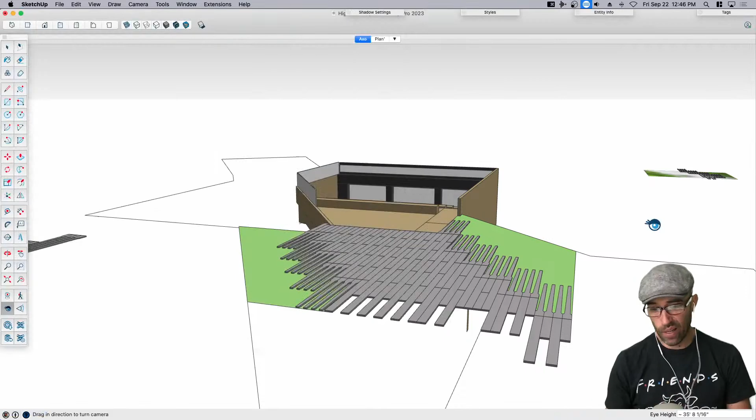I have a picture of a bench, I have this picture here. So we could create that, or I could just kind of add some textures to it and make this look a little bit better, and just kind of maybe put some trees in. I'm gonna put some trees in. I would say go for the plants, but yeah, that's just me.

So textures, let's see if I have any. Yeah, let's put some plants in. If I would render it, I would go into Chaos, into Cosmos, and start putting in some plants that kind of feel like, you can see all these different grasses and some shrubs and the layering, and you've got some mosses or whatever sticking up in between those.

One thing I want to do is grab a concrete texture. I'm just going to do some texturing, spend the last 10 minutes just kind of making this look a little bit better, and then we'll call it. Yep, the consensus from the chat is add textures. Yeah, I feel like I need to add. I mean, I want to.

So concrete, I can never find concrete. Asphalt, because it's called asphalt and concrete, so that kind of bugs me. This concrete texture is actually not too bad. So that's kind of a light gray.

And then I am going to grab a wood really quick. Let's see if we can find, I'm just going to pop this open. We're going to do this on the web, we're just going to type in wood decking seamless, see what shows up. And what do you think from the High Line?

Is it more of like a distressed seamless wood? Is that what you said? Yeah, is it like a distressed? It's kind of like, what do you think, there's some variation in there. Yeah, it's kind of faded. So seamless, you kind of want to do a seamless because, yeah, you got to be careful.

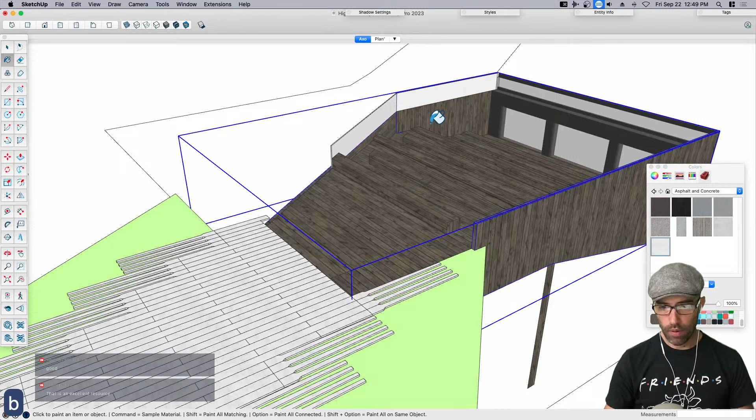And how is it on the sides? I'm guessing it's horizontal on the sides. It's not. Oh no, it's vertical. Oh, it is vertical. So that was right, that was sort of a happy accident.

Let's put some, I'm going to go 2D instead of 3D. So let's see if this works.

Sometimes, and I'll knock on wood here, sometimes my component browser crashes SketchUp. I have no idea why, it's just one of those weird things, like when I go to grab a component. Luckily it didn't. So I like to work with these Daniel Tal trees because they're just sort of fun and generic.

So if I look at this really quick, I can see a grid of trees, and it looks like they go at an angle in this deck. So the wood decking, oh this is easy, this is all wood decking, and it looks like there's how many trees? 1, 2, 3, 1, 2, 1, 2, and 1.

So we can do a little grid of trees. Let's try that. So this wood decking actually continues, so this makes my job easier. So if I just come over here and grab a rectangle, and I just come over here like this.

Randy from the chat says, once you start using those textures, you end up replacing all the built-in ones because the difference is so noticeable.

Yep, you'll end up, if you do this a lot, if you work with textures or want to go to rendering or something, you will find you need your own little texture library. And over time you find favorites that you like. I do have a library sometimes, but I don't always have them. What I haven't done is taken the time to go into SketchUp and make them my default libraries, so you can actually access them right into SketchUp. Oftentimes they just sit in another folder. Okay, so I'm going to do that.

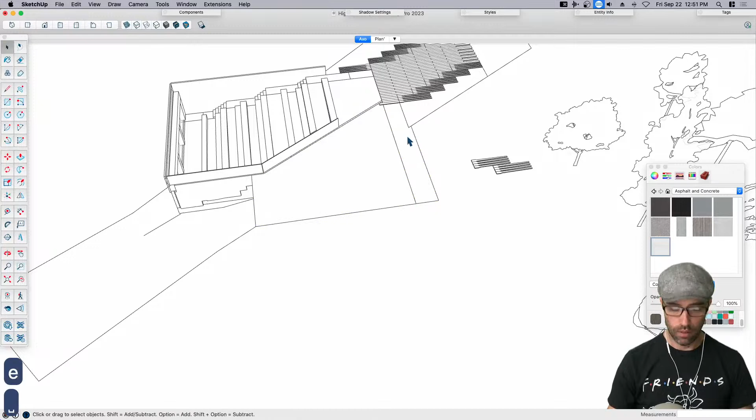I'm going to pretend like this is green. And there you go, so that would be wood. Although we need to check, we need to change the texture, we need to reposition it. I don't want to scale it, I just want to, let's see, there we go. And then this area here, I'm pretending I'm going to ignore that for right now.

Looks good. Let's put some veg in there, we're just gonna kind of play around.

And if you want, here's a little trick. If you go to extensions, I use one called Material Tools from ThomThom. You can just remove them from your selection. So if you wanted all of your trees, for example, to be the same color, you can just come over here and remove them. So like if I have maybe 4 or 5 different trees I'm using here, like in this case, I might use this one. I'm going to grab that one and pop that there and make a little grid.

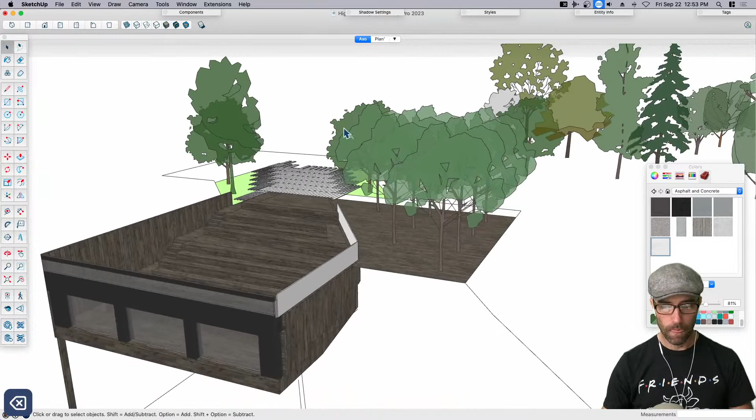I'm going to divide that by 2. And then I'm going to grab that grid and divide this by 3, and that one goes away. So you can just select all of these here and go extensions, materials tools, remove from selection, and grab, and then just go ahead and paint.

And this one is a fence, this is a fence material. Do we have good fence materials? Studio RT Cool says, or material replacer. Love that extension, material replacer. Yep, landscape and fencing. We don't have really great fence materials here.

I'm just going to put one in that sort of looks like a chain link fence. And then I think I'm going to, one thing that's kind of cool is, not going to do it here. Let's go put in some vegetation.

Speaking of V-Ray, sometimes I'll use a V-Ray material. So if you go V-Ray for SketchUp, you can come over here to Cosmos, and you don't always have to render it, you can just use a V-Ray material. So if I just typed in ground,

they just have nice materials. So sometimes you can say, oh, I like ones with leaves, something more organic or mulchy. So I would import that into my model. So there it is, it's in my model.

And then I would come over here and open up my asset editor, and under materials there should be one called dirt. And then I would just say, apply this to my selection. So there it is - the texture is sort of the wrong size, but that's okay.

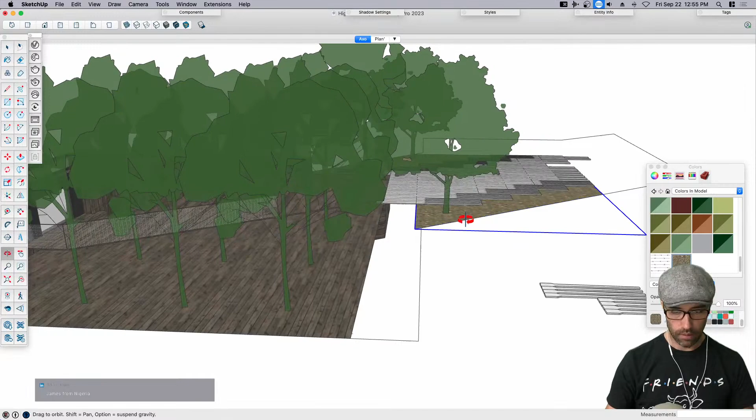And I want to bring this deck - this deck needs to be... I don't know what that's going to be, but we're going to put some people in, and then I'm going to call it. So let me drop some people in.

Let's come over here to components, and speaking of libraries, I have some people that I've just sort of saved. So maybe we'll grab a gal here.

Come on. Yep, what did I say? Something about the people that I brought into my SketchUp - I said it was going to happen, and it did. It did it. It did it. You called it. I called it.

So what we're going to do is we're going to open that up again. It's time - I'm not going to end the stream without having it as my backdrop. So we're going to open that back up again, and I'm going to say do not send. We'll have a talk with the people, the powers that be, later. Okay.

And I'm just going to pick kind of a cool view. I don't know, pick a cool view. That's it, folks. Okay, get rid of my trees.

And yeah, I'll upload this to 3D Warehouse, I'll post it on the forum for those that want to play with it - either the model, so this is 1001-bit tools. I don't need that, I'm going to go ahead and put that away. And I'm going to leave it there, I'm going to call it there.

We got a few more minutes to spare. I'm going to say, hey folks, this is why I prepare, right? When I do this in advance and work out all those kinks, I get a little bit further. But hey, this is modeling in real time - we get as far as we can get and have some fun together. So thanks everybody for coming and joining, giving up your Friday, whether that's afternoon, end of day, or middle of the night, wherever you're coming from.